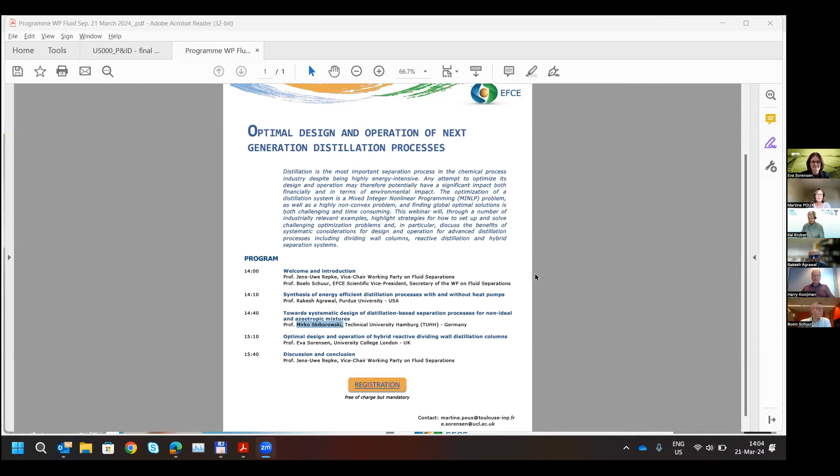We will be starting off with Professor Rakesh Agrawal, formerly with Air Products and now at Purdue University. He will talk about synthesis of energy-efficient distillation processes.

That talk will be followed by Kai Kruber, who is filling in for Professor Mirko Skiborowski from the Technical University of Hamburg, speaking towards a systematic design of distillation-based separation processes.

And we will round up with Eva Sorensen, at UCL, University College London, on the optimal design and operation of hybrid reactive distillation columns.

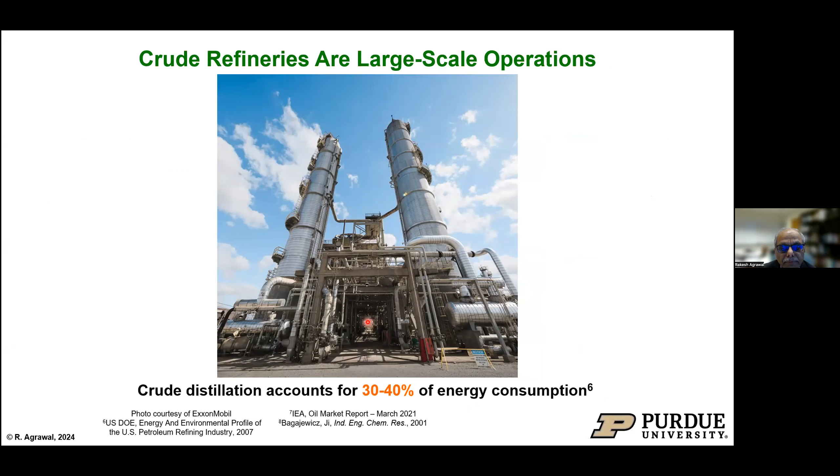Roughly 82 million barrels of crude are processed every day, and about 2% of the crude oil is consumed in the separation, the crude distillation itself. So for every 100 barrels, 2 barrels go towards distillation. If you were to reduce the energy consumption by 15%, implemented worldwide, you could save 245,000 barrels per day. So the impact could be quite humongous.

Around 7-8 years ago, we got together with ExxonMobil, and in collaboration we developed a method, and used that method, which is what I'll be sharing with you folks. So what does the crude distillation look like?

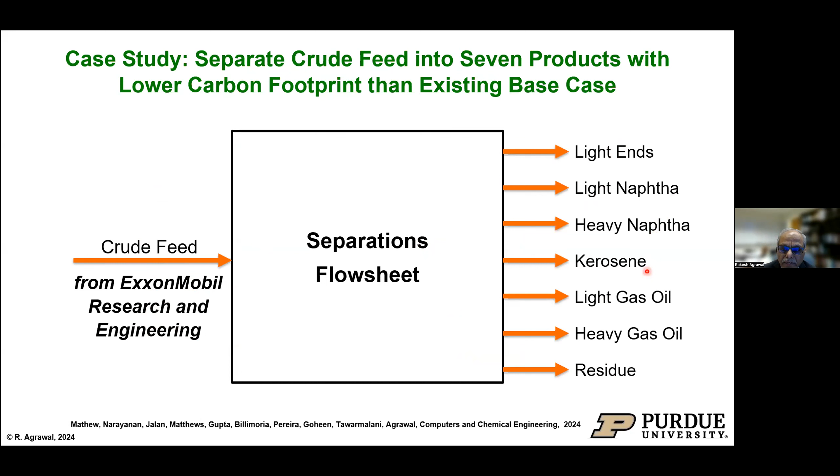The crude distillation basically, as you see on this screen, takes the crude feed and separates it into 7 components: light ends, light naphtha, heavy naphtha, kerosene, light gas oil, heavy gas oil, and of course the residue.

The overview of the method we employed was: first we collected all the problem data, meaning crude oil information, estimated their physical properties, and simplified the base flow sheet. Then we generated the search space of all possible configurations, used some reasoning for retrofitting, reduced the search space, optimized the model, and then walked backwards to generate the final flow sheets. That's what I will take you through.

Here is the crude distillation as given to us by the team at ExxonMobil. The crude oil comes in a pre-fractionator, it is distilled, there's a heater at the bottom, and this is the atmospheric distillation column with side strippers, where light end and light naphtha are produced, and the rest of the components follow: heavy naphtha, kerosene, light gas oil, heavy gas oil, and the residue.

So you can see there are 1, 2, 3, 4, 5, 6, 7 products.

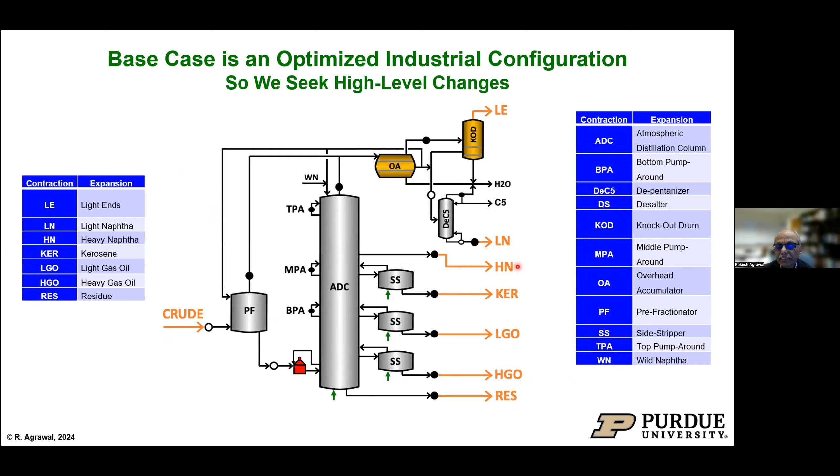In order to simulate and understand what is happening in the process, we simplified the flow sheets. For a given distillation, generally there's a condenser, separator, then pump the liquid to the column, and then the reboiler and so forth. But in my representation, I will just show the distillation column as a simple system with a condenser at the top and reboiler at the bottom, where the condenser is solid and the reboiler is hollow. That's the only difference.

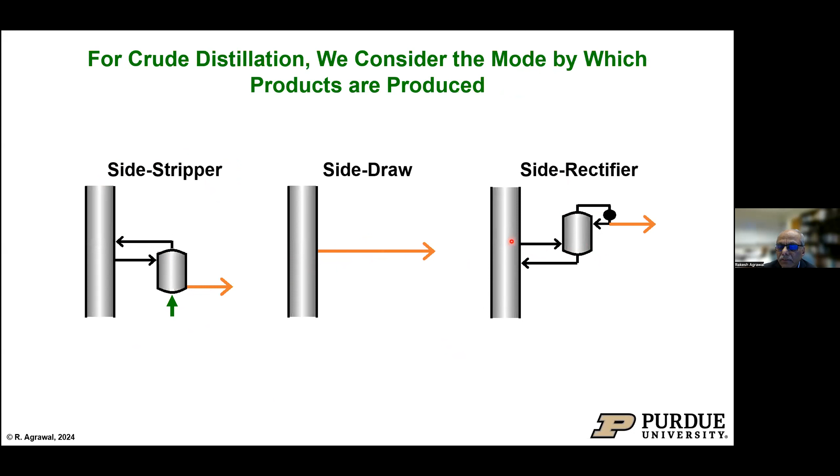The crude distillation uses a side stripper and side draw. It does not use a side rectifier, but we did include side rectifiers in our search space. That was introducing the crude oil.

If it is a 7-component distillation, 6 columns will be needed to perform the distillation. Here again is the crude distillation flow sheet, which is quite complex. As you can see, there are pump arounds for cooling, and steam is injected at various locations.

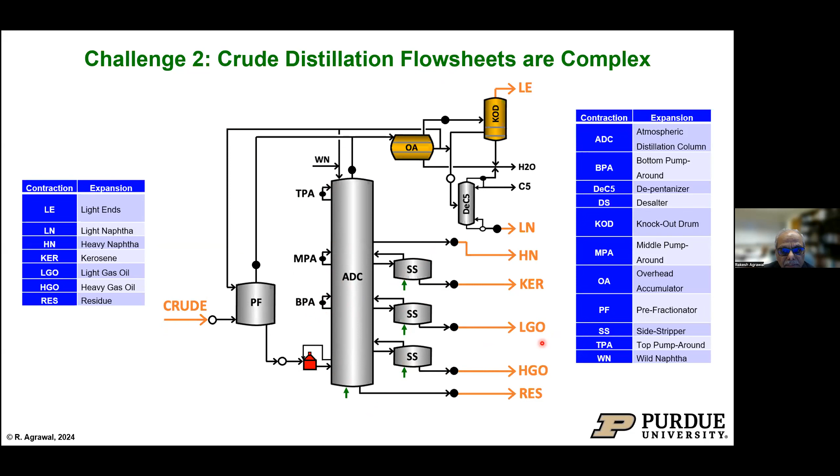Simulation of such a flow sheet is quite tedious and very time consuming, and it is not conducive to optimization. So we began to simplify the flow sheets to make them amenable to optimization. On the left you see the actual crude distillation.

We simplified it by removing all the steam injections with the reboilers, as you see on the right side, and also the reboiler at the bottom furnace which heats the residue. So we simplified the flow sheet, and all the light ends, light naphtha, and so on are represented as A, B, C, D, E, F, G. So the first step is to simplify the flow sheet.

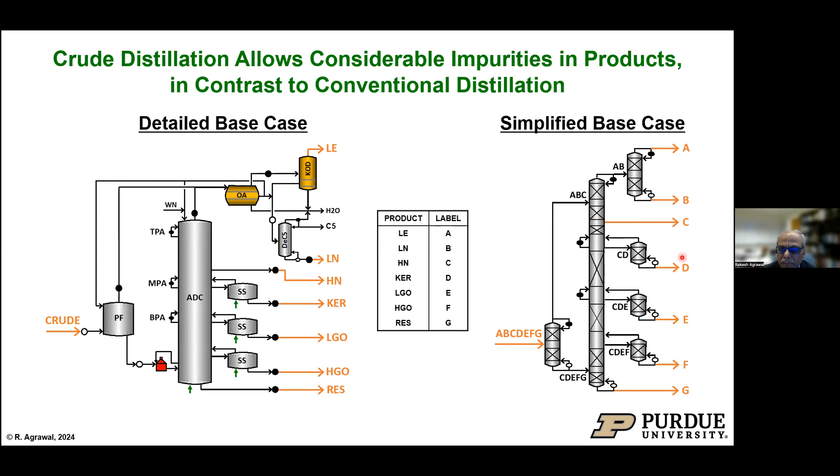All the methods so far in the literature, like for synthesis, produce pure products. But crude is not a pure product, as we said earlier, so all these fractions produced here do allow other heavy components. We decided we will allow that.

For example, the light naphtha, which is B, can also have some A, which is light ends, and it can also have some heavy naphtha components. So we allowed for some impurities to be present. Kerosene, for example, which is product 4, could have some heavy naphtha and some light gas oil. This way we allowed the adjacent components to be present.

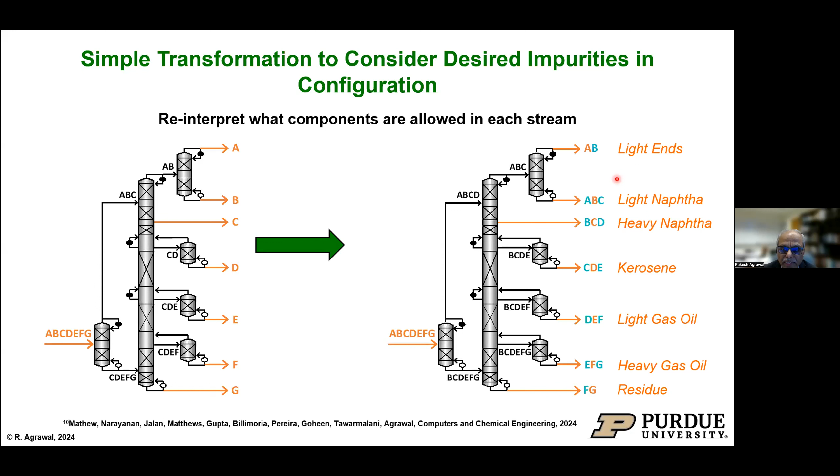For that, we had to modify our interpretation. Previously in the literature, all components were treated as pure; we simplified that and added the possibility of the lighter or heavier adjacent components being present in the product stream.

Then we synthesized the search space. For the search space, we included all the sharp splits, meaning A and B are totally separated from each other. We also included thermally coupled sharp splits, meaning the vapor from one column goes to the next column, and the liquid from the next column provides the reflux.

In these two-way thermal coupling systems, there's no reboiler or condenser. We also allowed for the sloppy split, meaning a component overlaps between the top and the bottom of the distillation column. For example, component B overlaps between the distillate and the bottom product, and thermal coupling is also allowed in these sloppy split configurations.

Using this method, we can take the column arrangement I already showed you and rearrange it, because the way it was drawn from the simplification of the actual crude distillation is not amenable to the methods used for optimization.

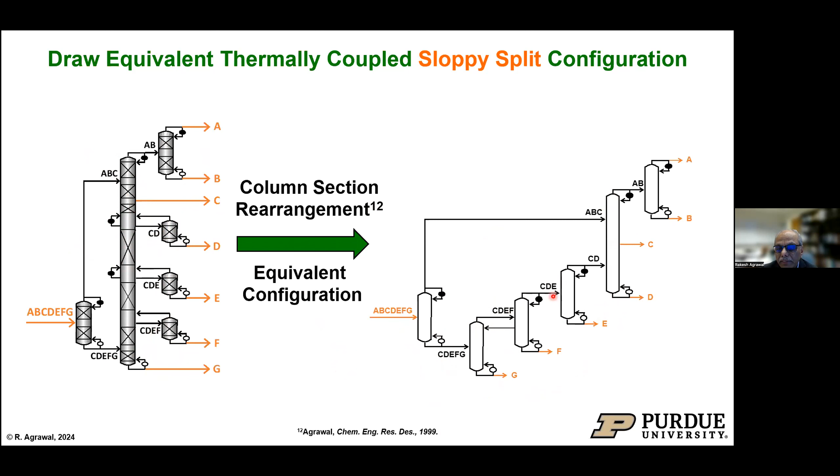So it is redrawn on the right-hand side in a simplified manner, as I told you, with the condensers and reboilers. What you notice is that the configuration on the right is exactly the same as the left as far as energy performance is concerned. Those are two equivalent column configurations, and you can easily draw them by moving the sections. For example, you could take this side and move everything underneath to the left, then move everything on top to the right, and so forth. This was published a long time ago, and the advantage is that now every column has a bottom and a top, bottom and top, bottom and top. So it is much easier to model.

Then we use Shah and Agrawal's method to draw all possible configurations. In this method, you represent all the streams in a matrix, and if the streams are present, they are 1; if not, they are 0. By assigning different streams, you can generate all possible column configurations. When you do that for crude distillation, remember there are 7 products, and for that there are roughly 85 million ways in which you can arrange these 6 distillation columns to find the most optimal one.

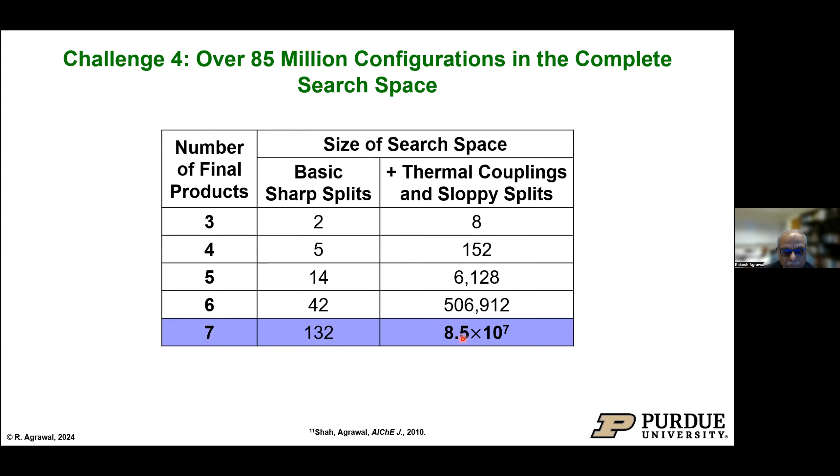So what we did was take that method and simply add to it, as I said earlier, the possibility of presence of adjacent components. The pure search space did not change because we still use the Shah and Agrawal method with only this added possibility. So there would still be about 85 million configurations to solve, with the only exception that the formulation now has to allow for adjacent components.

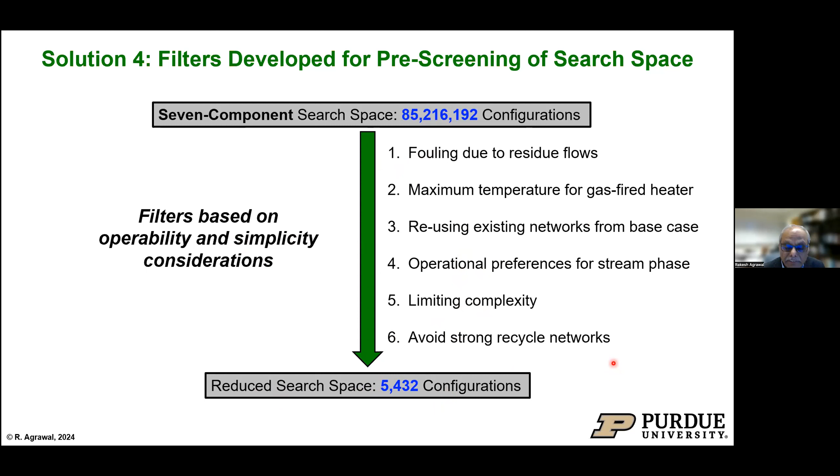When we used that, the search space was reduced to 5,432 configurations. By the way, that is still a very large number to go through to find the optimal configuration.

They also wanted to ensure that some of the existing systems could be used, specifically the top knockout drum, the depentanizer, and the water recycle. So we took all that and included it as a simple column A to B. This whole configuration is now converted to what is shown on the right side - the left is the actual one, the right is the simplified one.

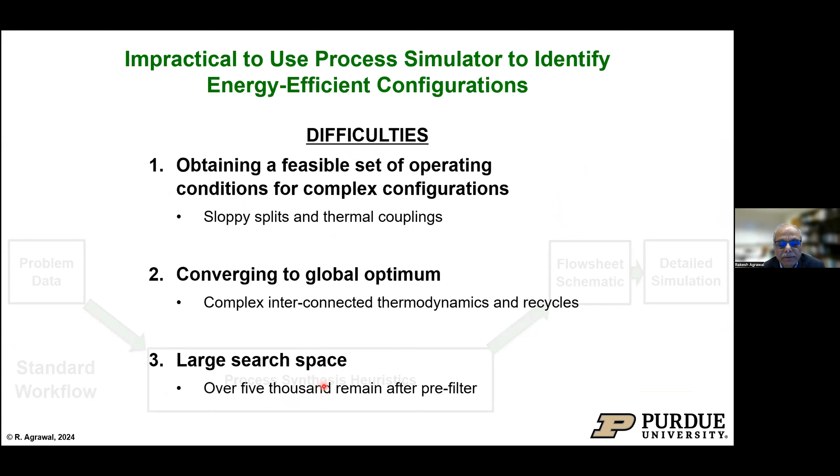Normally, one would use process synthesis heuristics to solve these simulations. But the difficulty with heuristics is that a feasible set of operating conditions is very difficult to get. For any given configuration, figuring out the split of components between top and bottom is almost time consuming and tedious even for simple systems. There's no way to converge to global optimality, and with over 5,000 configurations, the problem is quite complex to be solved by any heuristic.

So what we did was generate all those 5,000 plus configurations, then used our shortcut optimization model, did some candidate selection from the configurations - a handful of them - and then did the detailed optimization.

So how did we do our formulation? What does our formulation look like? We used our earlier formulation but made a lot of changes for crude distillation. In the past, what we've been doing is minimizing the total reboiler vapor flow rate between all the reboilers, okay?

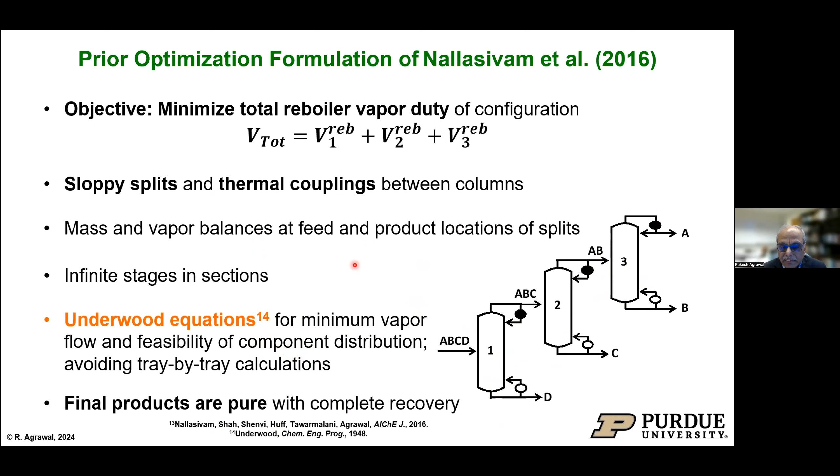Thermal couplings were obviously allowed, and we do mass and vapor balances everywhere, and we use Underwood's equation to calculate the minimum vapor flow in each one of them. And of course, the final products are pure components in the past, but now we will not do that, right?

So what are the assumptions of the original shortcut models, like constant relative volatilities, non-azeotropic mixture, uniform pressure, and the usual McCabe-Thiele assumptions of constant latent heats and every component having an equal latent heat, leading to constant molar overflow. But this model, by the way, works pretty well, as we showed in one of our publications.

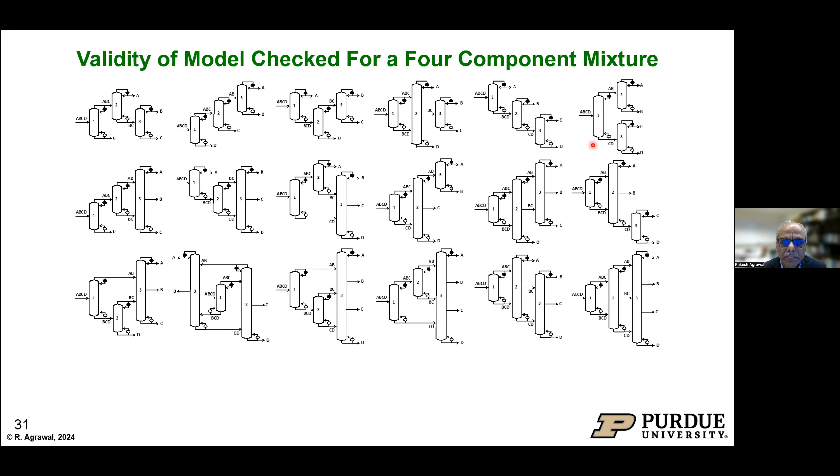For example, for a 4-component mixture, there are 18 possible ways the 3 distillation columns can be arranged. And the goal is to find the most optimal one.

The reason for that is basically to calculate the split of the flows between components which are overlapping. For example, like AB and BCD, how do you find what is the split between the B and so forth? And BC and BCD, how do you find the correct split between BC and CD? That's what makes it so complex.

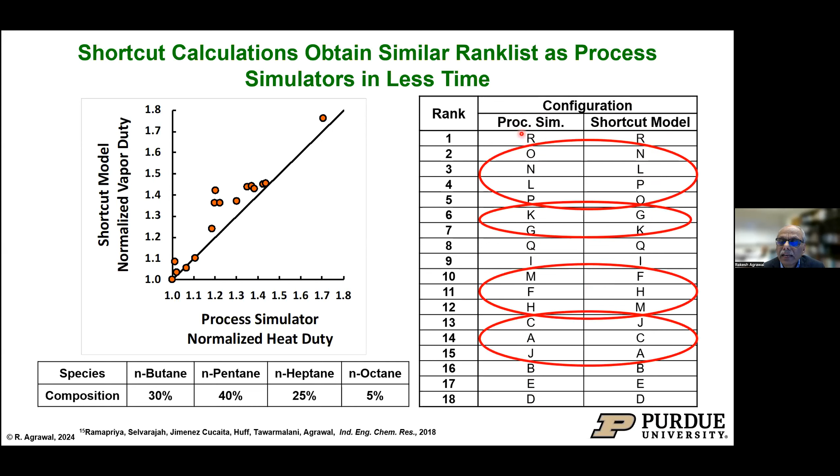However, we still wanted to modify that for crude distillation, because there's a great deal of variation in the relative volatilities between those 100 components. So the assumption that components have constant relative volatilities, we challenge that. The assumption that components have the same latent heat, we challenge that, okay? And the restriction that products are pure, we challenge that.

And not using a condenser, we allowed for some heat integration between the reboilers and condensers. So how did we do that?

The first thing was we took the relative volatilities and we said, well, this is the vapor liquid equilibrium, the actual vapor liquid equilibrium. So we did not treat it as relative volatility being calculated either at the feed or the product ends, none of that. We pretended that this is the real equation.

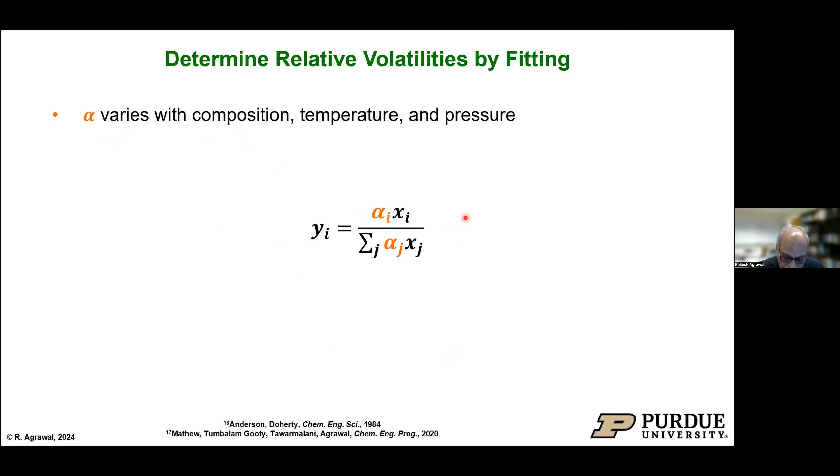So what happens is it becomes our surrogate VLE model, and we fit that to the actual vapor liquid equilibrium data while minimizing the error in the prediction. And that's how we calculate the relative volatilities now. It really predicts very nicely the vapor liquid equilibrium in all the distillation columns.

Now what happens is the assumption of constant molar overflow is no longer needed, and unequal latent heats can be accounted for. And now, rather than minimizing the reboiler heat duty, we minimize the actual heat duty for each of the distillation columns, okay?

And then what we did was for the products, like I said, for brownfield application, new products must be similar to the base case, right? Because if you're already doing a distillation of the crude, you don't want your product compositions to change significantly. Therefore, what that means is the products must remain the same phase.

But we did allow some tolerance between the existing distillation column flow rates and the new distillation column flow rates. And those epsilons are the tolerance between what would be calculated, what was the base case, and a little bit less than base case, and a little bit higher than base case.

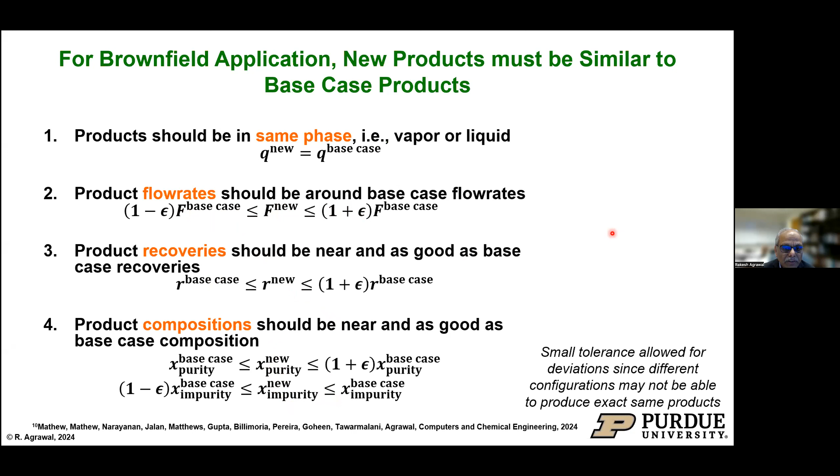We did that for the recoveries, and we did that for the purities and the impurities. Some leeway is allowed in the variation in the flow rates, as long as the recoveries are maintained and the purities are maintained within some tolerance.

We developed a new method, like the shortcut method, to allow for heat integration between the reboilers and condensers. What that means is, for example, this condenser ABC could produce the boil up in B, and this is possible as long as the bubble point temperature of the vapor coming from column 1 is higher than the saturation temperature of component B. So as long as ABC vapor is warmer, it can transfer the heat here, so we don't need an external heat source. So in the model, how do we check that?

We came up with a new method. We defined a term called beta, which is the reduced relative volatility. As long as the beta of stream ABC is less than the beta of stream B, this temperature is justified, and we provided a proof of this. So now in the optimization, as long as we know the compositions, we can calculate the betas, and therefore we know whether the heat integrations are allowed or not.

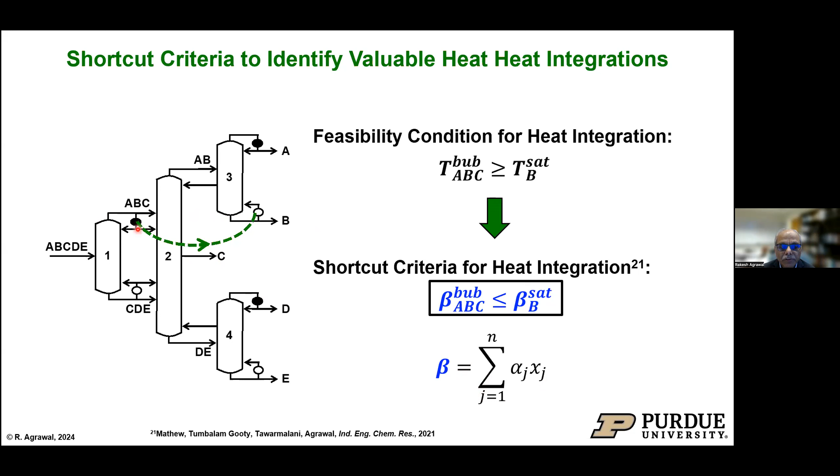So we could allow for the heat integrations, and then we also put some additional constraints related to what was given to us: the residue must be in the liquid phase, the upper limit on the temperature of the gas-fired heater was given to us, and the light ends portion on the top must be in the vapor phase.

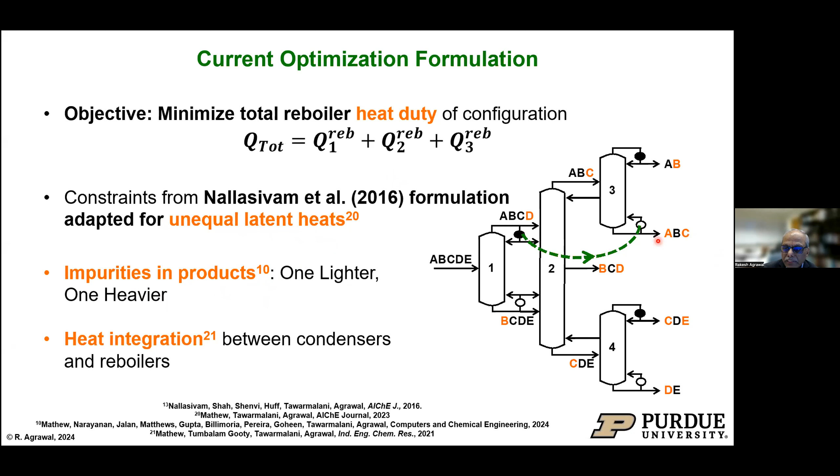Using all that, we optimize the problem. We optimize the Q total — as I told you, now we are optimizing the actual heat duty. And while accounting for the unequal latent heats, impurities in the products are allowed, because as you can see, B output have A and C, and the heat integration between the condensers are allowed.

So what happened now, the model has become much better because the vapor liquid equilibrium is a surrogate of the true VLE, and also there's no more assumption of constant molar overflow. We have a constant heat transport, and we use those assumptions in the optimization model then to optimize. And for optimization, I will show you some of the results now.

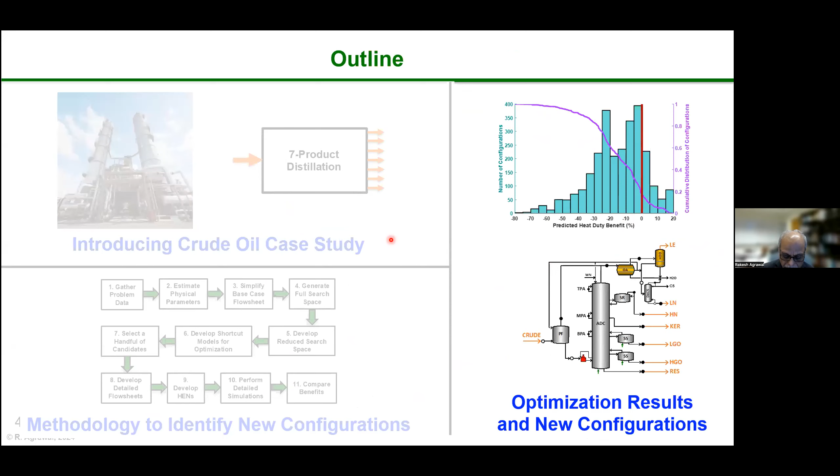So the results are here. What you find is that all 5,432 configurations were solved using the model. And what we find is that only 465 configurations within the constraints given to us would consume lower heat duty than the existing crude distillation.

The beautiful part of our optimization routine is that almost all of them converged. 2,732 infeasible means that these configurations cannot meet the process specifications being imposed, meaning either the purity is violated, or the flow rate is violated, or the recovery is violated. But from the ones that converged, we identified 465 configurations.

I will show you the results of only 2, because out of these 465 configurations, we have to take a handful and check with detailed Aspen simulation to make sure that what we are predicting is correct. Because the model has simulated all those 5,000 plus configurations and has given us a small subset of configurations which it claims to be better than the crude distillation.

So we picked only 2 because I have to tell you that each one of these configurations to simulate in Aspen Plus took us a good amount of 4 to 6 months. So that gives you the magnitude of the problem involved here.

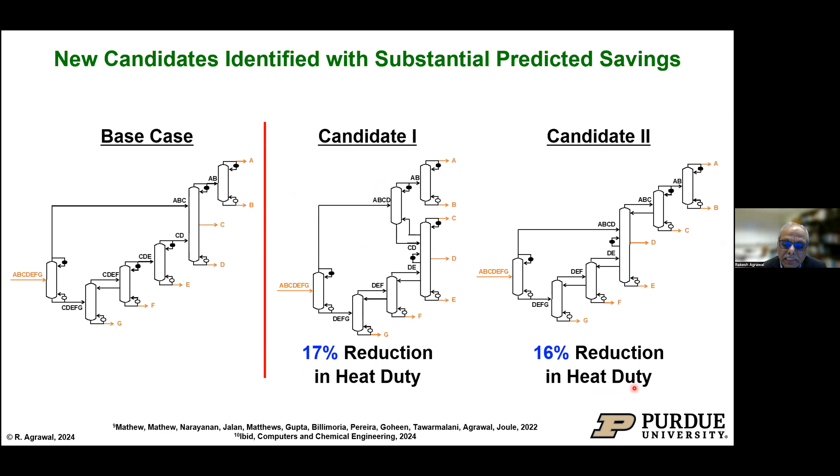So I'm just going to show you 2 candidates, candidate 1 and candidate 2. Candidate 1 from our shortcut model says it should have a 17% reduction in heat duty. Candidate 2 says we should have a 16% reduction in heat duty compared to the base crude, meaning the current crude distillation. So what we did was, now we have to walk backwards, meaning take the simplified flow sheet and create the actual crude distillation, how it would look like. So now we are walking backwards.

The first thing you notice is that suddenly candidate 1 has a side rectifier, as against the current configuration which only has side strippers. It moved C to be on the side rectifier and D as a side draw. So it made skeletal changes to the flow sheet. In candidate 2, D should be produced as a side stream and C should come out of the stripper. That was interesting.

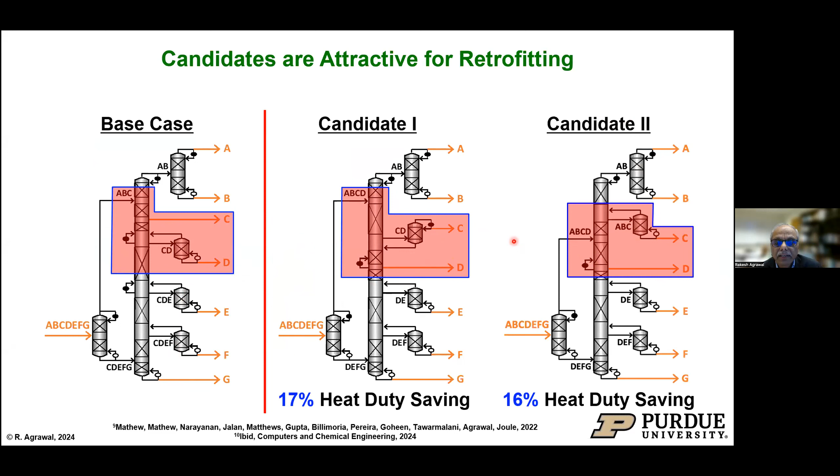Then we took simplified candidate 1 and further converted it to a detailed configuration with all the steam injections, basically replacing the reboiler for E, for example, with steam. So this configuration is equivalent - if you were to build it, this is how it would look. We are walking from the actual flow sheet, to the simplified flow sheet, to now creating the actual distillation configuration.

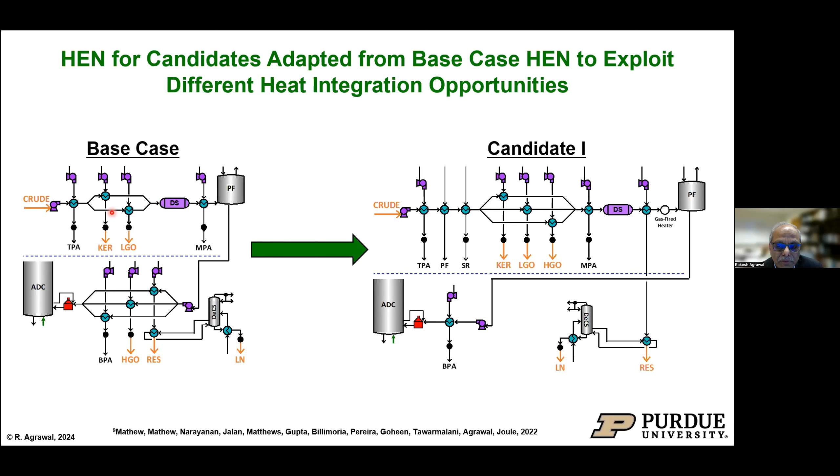Then it was simulated in Aspen, along with the heat exchanger network. When the feed comes, we had to even simulate the front crude because there's a pump around where there's heat integration, and the pump arounds are at different locations. So we had to go back and work on the heat exchanger network in the front also, so it is in line with the distillation column. Both were optimized in Aspen together.

What we find from the detailed Aspen simulations is that for candidate 1, the actual savings predicted by Aspen is 15%, as against the shortcut model which predicted 17%. We are very happy because it shows that in this large search space, we can find distillation configurations which predict the order of magnitude of savings from the detailed process model to be roughly the same as from the shortcut model - candidate 2 gives 13% heating duty savings compared to the detailed simulation. Both also give equivalent carbon dioxide emission reduction.

So the power of the method is pretty nice. All the product streams produced also meet all the specifications, like ASTM-D86 temperatures were met - these are the deviations for candidate 1. The deviations are really small, the maximum deviation is 10% in the flow rates, and the average is 5%. So that's pretty good.

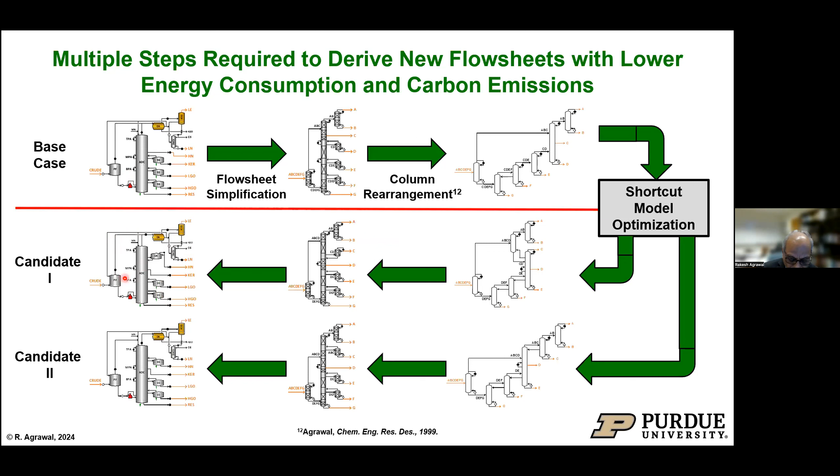So to sum up: you take the base case flow sheet, simplify it, and redraw it in an equivalent configuration with column rearrangement, so each column produces only one product at the top and one at the bottom. Then you optimize it in the shortcut model as described, find the candidates, walk backwards and arrange them the way a crude distillation column normally looks, with all the pump arounds and steam injections. Then you do detailed modeling of this configuration. So from 85 million configurations we came to 5,000 plus, and from those we can find configurations which are quite useful.

I had something on heat pumps, but I think probably two minutes are remaining, so maybe I should skip most of it, but basically heat pumps are something new in terms of possibilities to improve the efficiency of distillation columns. We are developing a model for heat pumps pertaining to multi-component distillation. If you look at a ternary system, just to give you a feel for how complex this problem is, a 3-component distillation uses 2 columns and has multiple reboilers and condensers.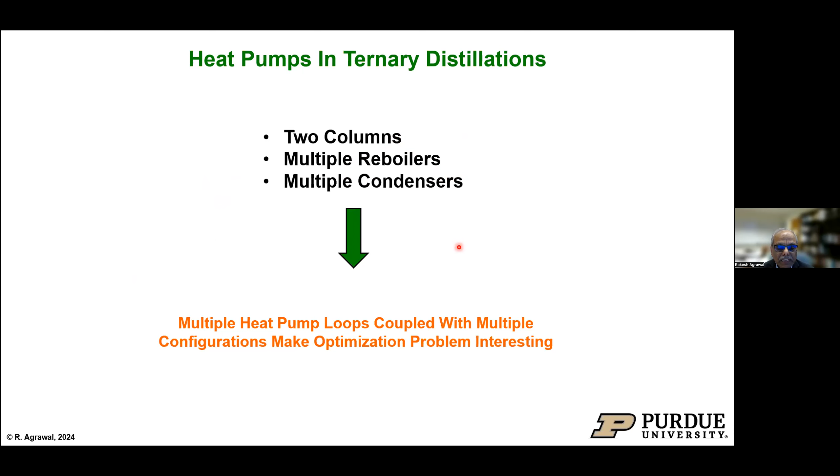Each column has a reboiler and a condenser, and what happens is the pump arounds can be heat pumps could be between any reboiler or any condenser. And when you use that, I'll just show you a glimpse, more than anything else.

If you consider a ternary mixture of pentane, hexane, and heptane, and you try to find the optimal heat pump, the answer is dependent on the feed composition, and there are many answers. As you can see on this triangular diagram, pentane is on this side as the lighter component, hexane is on top, and the heavier component, heptane, is here on the bottom left. You can see that different configurations with heat pumps are shown in blue.

For example, if you look at this configuration, the heat from distillation column A is pumped to the feed, and there's heat integration between B and A, because pressure is increased on the second column. So what that means is that the vapor from B can boil the bottom of the first column, and so forth.

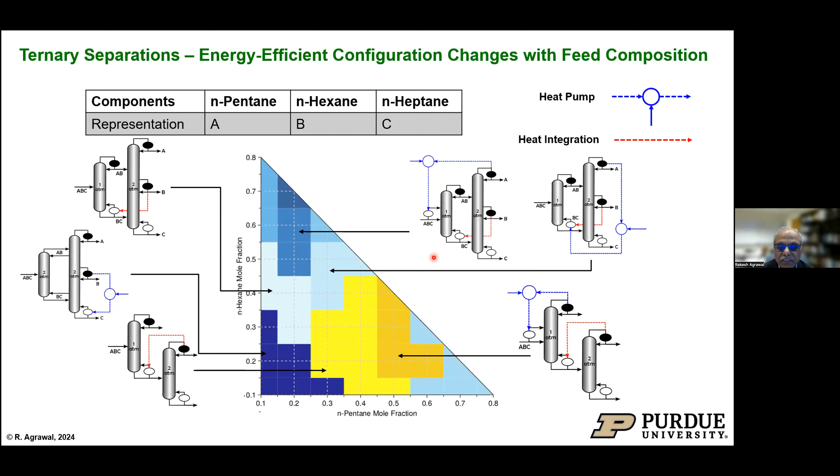So basically, I just wanted to give you a glimpse in the sense that when looking at the heat pump, depending on the feed compositions, the optimization problem is really quite a bit more challenging than it looks. But the energy savings could be quite large depending on your composition.

If the middle component is high, that gives you the highest energy savings, and as you go towards the bottom, the savings decrease. So the choice of the heat pump coupled with the choice of the distillation column sequencing and the feed compositions makes the problem quite interesting.

The bottom line message I wanted to give here is heat pumps should consider intercolumn heat integration, otherwise the heat duties are quite large. Column configurations change with the feed composition, and possibilities grow very quickly with the increase in the number of components in the feed. The problem is even more challenging than the earlier crude distillation problem which I described to you.

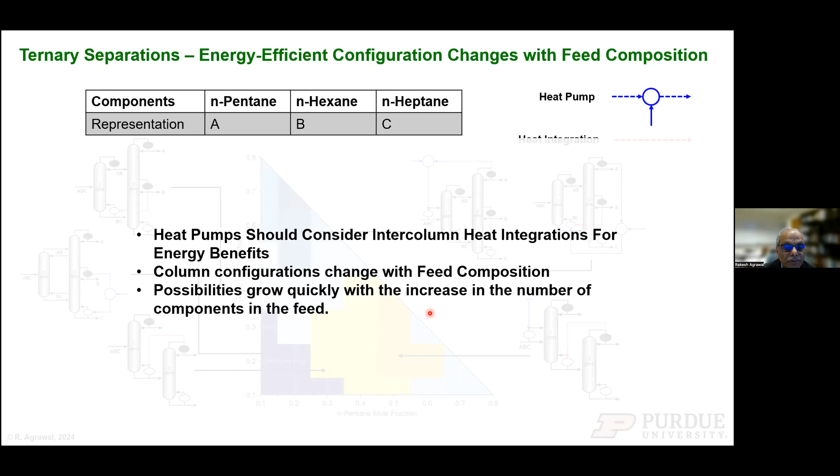So in closing, new configurations have the potential to lower energy consumption, but the process of identifying attractive ones has many challenges. We have developed a shortcut model which does capture the relevant physics of the problem.

We have gone through a lot of extensions, modifying the vapor liquid equilibrium curve and representation, and including the changes in the latent heats between the components. We also calculate the heat duties now, and calculate the heat integrations between the reboilers and condensers, and we allow for adjacent components to be present in any product stream.

And with all those modifications, our algorithm works extremely well. We took a very complex problem of the crude distillation, which is probably one of the most complex distillation problems one can imagine.

We showed that it is possible to find a handful of configurations with substantial reduction in the energy and carbon dioxide emissions. Finally, I wanted to tell you that we have begun to work on heat pumps for the multi-component case, and that problem is very exciting because it has many possibilities.

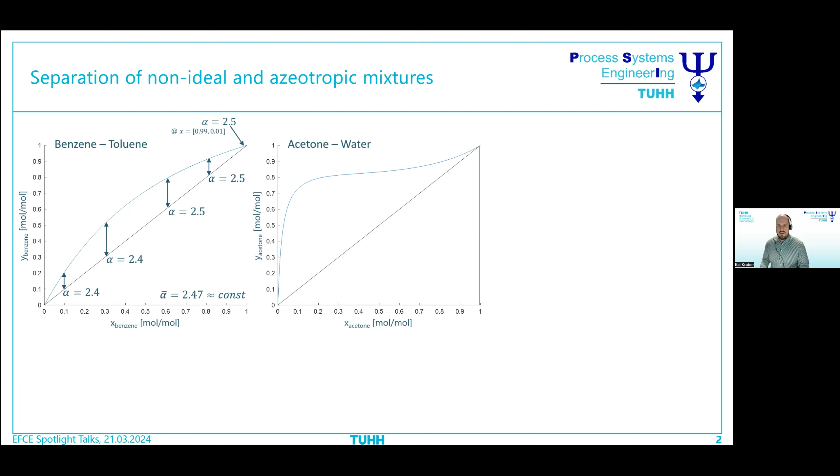We've already heard a little bit about the assumption of constant relative volatilities, but just to give a short introduction: as we all know, there are mixtures that act closer to ideality, for example benzene and toluene, where the assumption of constant relative volatility is certainly valid. And for example the mixture of acetone and water, where we can directly see that this assumption may not be used in simulation or optimization, because in the end the implication is that our best solution, or our best process configuration, is highly dependent on the assumptions we take, and may differ for ideal and non-ideal systems.

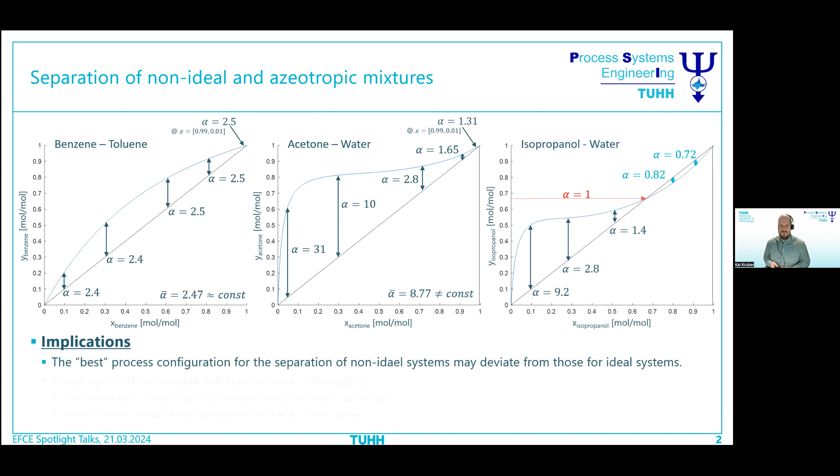And just to draw the full picture, as we're all aware, fully distillation-based separation is not possible for azeotropic mixtures - here, as an example, isopropanol and water. This imposes new challenges for the separation, like thermodynamic modifications, pressure swing distillation, extractive distillation or azeotropic distillation, and the consideration of hybrid processes like membrane distillation or extraction, and sometimes combinations like heteroazeotropic distillation, where we face new challenges as the processes get more and more complex and interconnected.

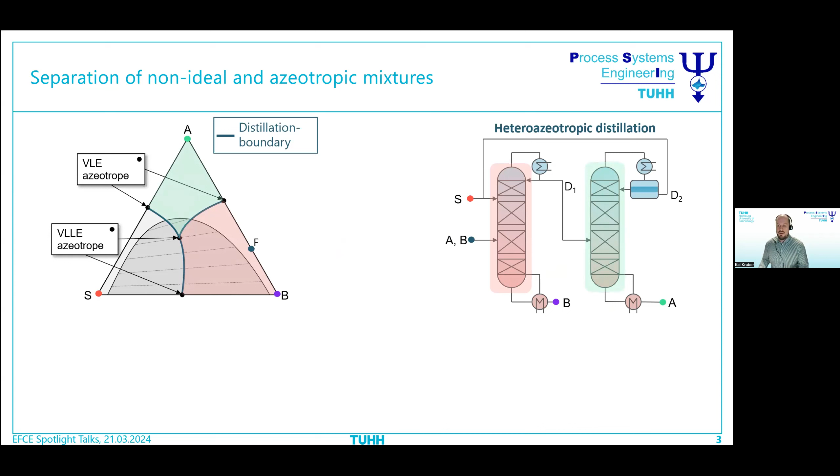So if we take a look at, for example, heteroazeotropic distillation, we already see that we have, even for a ternary mixture, a quite complex mixture topology with 4 azeotropes and 3 distillation regions. And we see here that the process is operating actually in 2 different distillation regions, and this makes the design at least challenging. So the generation of flow sheet candidates is very challenging. On top of that, we need to account for the choice of a mass separating agent to enable an efficient process design, and also in terms of optimization and process intensification, this is at least challenging.

So there's a need for systematic tools that support us in designing these non-ideal separation processes. One way - we already heard about the heat pump assisted part - is to look at energy efficiency. We oftentimes look at process costs or the pure energy intake of the process, but the energy efficiency, especially for distillation, is a very interesting measure to rate our process and how well it performs. The energy efficiency is the ratio of the minimum energy, or minimum work, to separate our mixture, divided by the actual work of the process.

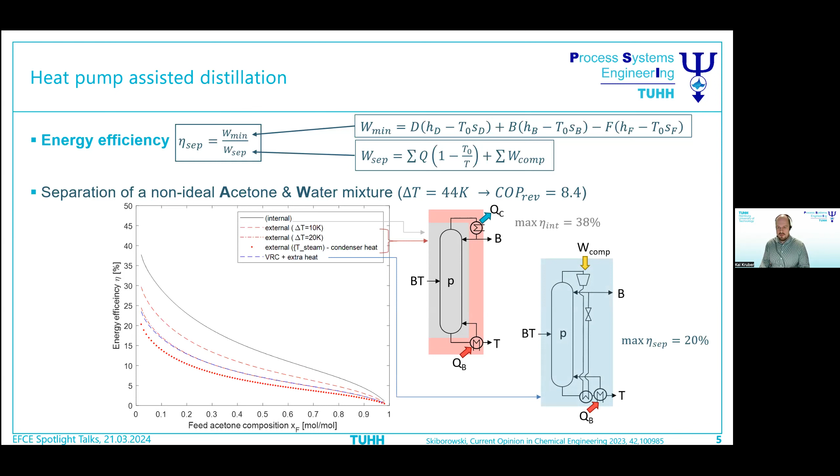If we take a look at the vapor recompression, we can increase it a little bit compared to the external one, where we do not consider our condenser heat being used in the process, but we cannot surpass 20%. And with increasing acetone composition in the feed, we drop quite significantly in energy efficiency. So why is this the case?

If we take a closer look at the binary mixture for acetone and water, we see that we exhibit a tangent pinch at the top of the column, at high acetone compositions. This limits our operating window and the efficiency we can reach here.

For the simple column, we picked an internal and an external efficiency for comparison, shown on the bottom. The external efficiency does not consider a fixed delta T, but rather a chosen steam level, a pressure level of steam for heating the reboiler. We can see here that we only have an efficiency of 8.7%.

If we take into account the heuristics that you learn at university, or that are common in distillation practice, a relative volatility above 1.3, maybe 1.2 to 1.4, should be enough. But we see that even at high concentrations of acetone, where we have a relative volatility of 1.3, the efficiency of the process is still really low.

If we now take a look at the vapor recompression for this simple example, we can see that we can increase the efficiency a little bit, but not too much compared to our external efficiency of 8.7%, which is due to the tangent pinch at this point.

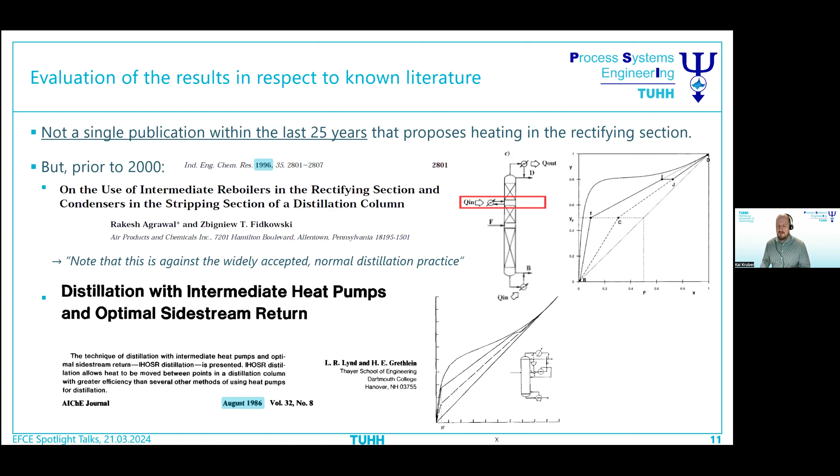to the internal efficiency of the simple column. This is very interesting. But no doubt, to build the process, this will get a little bit more complex. So of course we have to integrate our heat pumps, our vapor recompression in the process, but also we have to take into account that the vapor load in the different sections varies quite a lot. So we need to adjust the diameter in these parts.

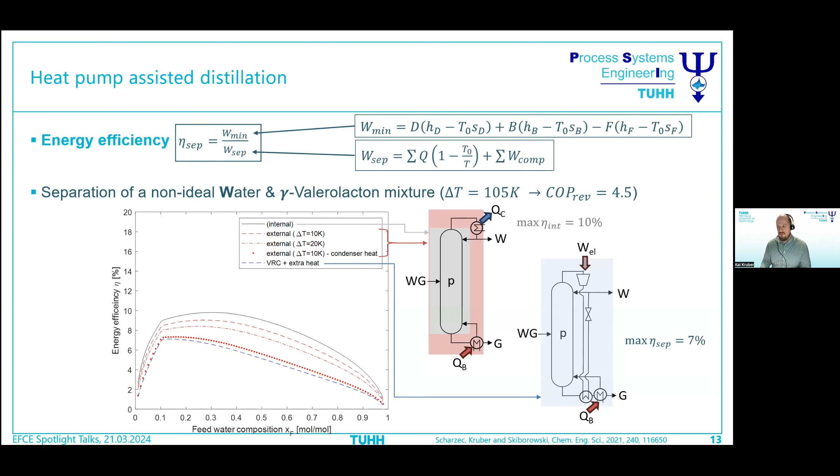If we take a look at another example, we can see directly for water and gamma-valerolactone that there's a very poor efficiency of at most 10% with respect to the internal efficiency. This looks even worse for the external efficiency. So even with vapor recompression, we are not able to push this really far. And this is mainly, again, due to a tangent pinch that occurs for high water concentrations.

Although we have a pretty reasonable relative volatility in the high water content areas, the process efficiency is determined by that. And we also have in our assumptions a feed that is an aqueous solution of GVL with only 5% gamma-valerolactone. And yeah, for that reason, we have the poor efficiency of the distillation column, since we have a very high distillate to feed ratio, and of course the tangent pinch in the rectifying section.

So in this case, it makes total sense to think about hybrid processes and to combine the distillation column with different unit operations. And in this case, we picked a few of them as an example: membrane-assisted distillation processes, extraction, heteroazeotropic distillation, or extractive distillation. And our selection has in common that we often need to select an optimal mass separating agent to get an economic and ecologic performance of the process.

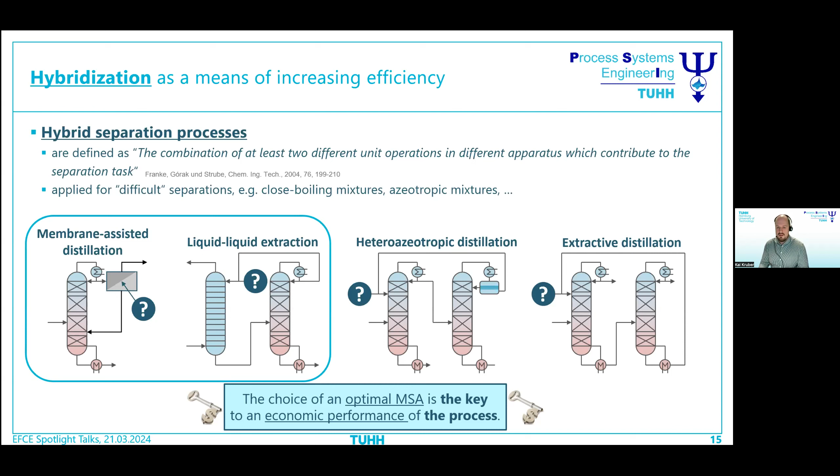This is, of course, especially interesting for our system, and as you may already know, for these highly diluted aqueous solutions, liquid-liquid extraction is very interesting for these processes. So the challenge here is of course first to find a suitable solvent, and in the best scenario, the optimal solvent. So what you can do is go to a solvent database, select and test with a few models. But in recent years, it gets more and more prominent to fill these solvent databases with predictive thermodynamic models, which is a great opportunity, but also increases the search space tremendously.

That's why at the university in Aachen, they thought about investigating 5,000 solvents for the shown case study. They used as a model a shortcut model for the extraction column and the distillation column. So they took a look at the minimum solvent amount needed to perform the separation and the minimum energy intake for the distillation column. The shortcut offers, of course, the opportunity that the calculations are very fast and you can easily take a look at thousands of solvents here.

But nonetheless, it has some crucial assumptions that with a detailed look at the process should be omitted at some point. So what we did is we took the results coming from Aachen and made a rigorous optimization for the process. We closed the recycle, formulated a superstructure optimization model, and took a look at promising solvent candidates here. Compared to the benchmark solvent butyl acetate, we could really improve the total annualized cost here by roughly 50%. This is a great example of integrating different levels of detail in the models.

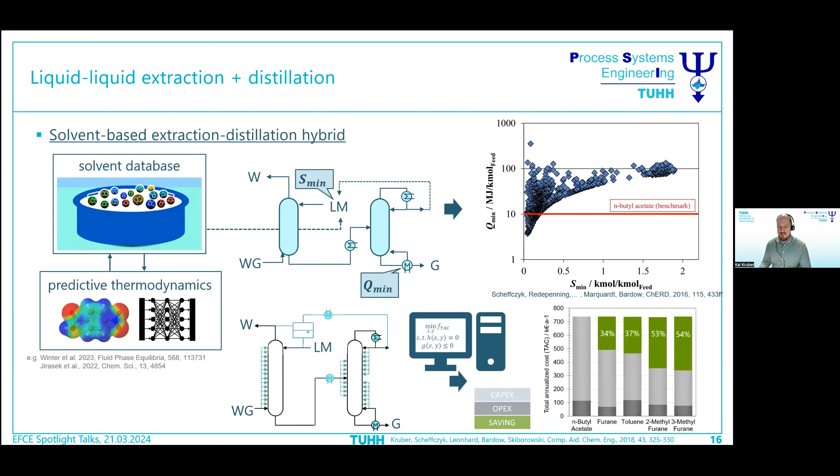What we see compared to the simple distillation column is that we have huge saving potential here for our benchmark solvent and also for the solvent toluene, for example. We can see that we save energy and total annualized cost in the comparison. So distillation, as already indicated by the energy efficiency, is not a suitable case for this part.

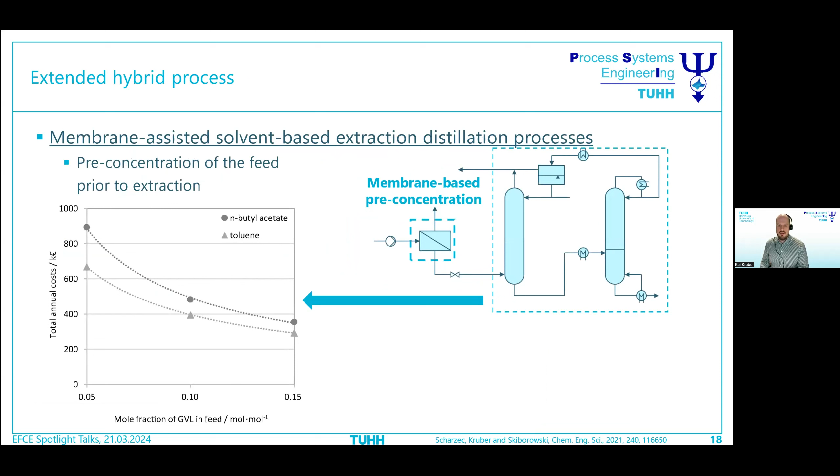We further thought about how to enlarge the process and improve it, and came across the idea that we could pre-concentrate our feed using a membrane process, because membrane processes are very well suited for concentration of aqueous diluted streams. So what we first checked with our existing model is whether there's a potential, and how big that potential is when we increase the mole fraction in the feed to the liquid-liquid extraction column. We saw a great benefit there, so we continued.

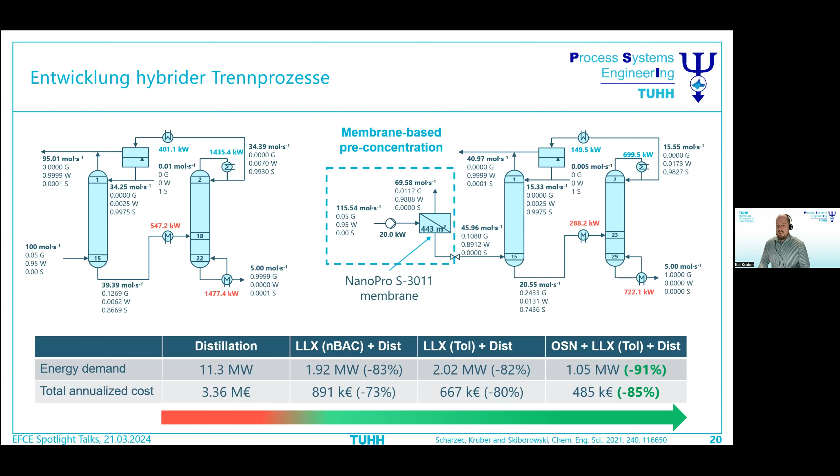If we now consider an example of separating azeotropic mixtures, I want to show you something we investigated for extractive distillation columns. Here, very comparable to the liquid-liquid extraction, we have the solvent selection, which we can do by looking at databases, or enriched databases with predictive thermodynamics, and try to choose an optimal solvent. We still have the challenge of the process design itself, so again here we have an optimization of a superstructure model.

Since both unit operations are distillation-based, we also have a considerable amount of heat integration we can do, so we can save a lot of energy here. What we considered was simple heat integration, the thermally coupled variants, which you see on the left, and also a heat pump assisted process — in that sense, a vapor recompression — for either column, that's possible.

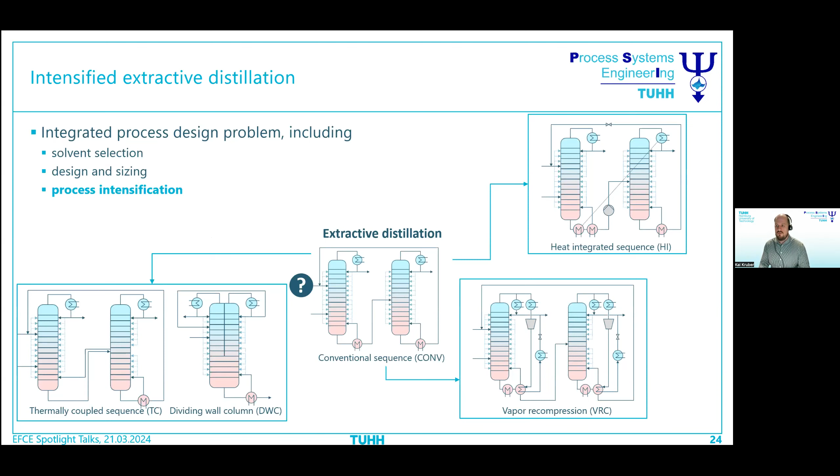We could have potentially put all this together in a big superstructure model and seen what the results are, but this would blow up the problem tremendously and make it very, very hard to solve. So what we did instead is a hybrid optimization method: we coupled an evolutionary algorithm together with our local deterministic optimization in GAMS.

In each generation, or for each individual, the evolutionary algorithm defines the solvent selection — it selects one solvent, one process intensification method, and gives initial starting values for the feed stages and the total number of stages of the different columns. So for the different individuals, we get back the fully optimized, locally optimized process with an optimal design, along with the information on the total annualized cost.

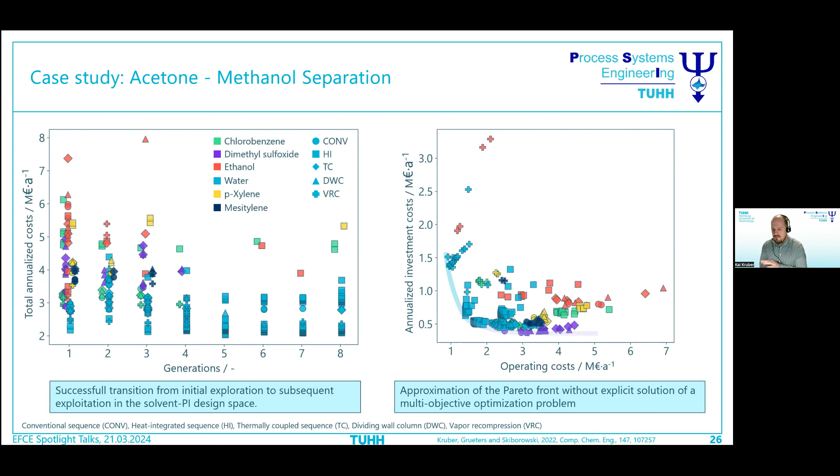As a final slide, I want to give you an even more detailed insight into the results here. If we now consider all the best combinations that occur throughout the evolutionary algorithm execution, we see that if we only considered the sequential step of selecting a solvent, taking a look at the conventional processes, we would see that DMSO may be the best candidate.

Then we would consider in the next step the means for energy integration, and we would realize that only the conventional process should be used in that case. But we would completely miss what we see if we do this examination in a simultaneous way. So having all the information at hand in the same step, we see that the simple heat integration of a water-based process can save even more in terms of the total annualized cost.

So what I've shown you is a different way of seeing the processes, basically an exergy-based approach, or as an objective, the thermodynamic efficiency. We can get some valuable insights here into how we can increase the process performance or what opportunities we have for energy integration.

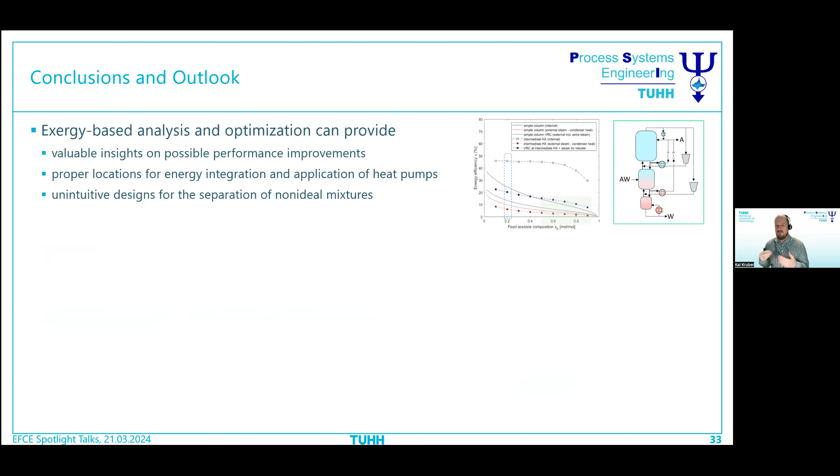I also showed you a few examples here for the hybrid separation processes and the challenges that go along with it. We need to consider, for example, the selection of a mass separating agent, the process configuration, and also the intensification all in one step. But we can significantly improve the processes that already exist.

Maybe as a very brief outlook, and also as an advertisement for the software tools and elaborated models that are out there, on top of that we can do very, very interesting things to improve and further achieve improvements here.

So we could think about flow sheet synthesis and design, and machine learning approaches to even get more out of these very valuable process models. And with that, I want to thank you for your attention.

Thank you, Kai. We have one question, an anonymous question, which I think is actually a very good one.

The remark is that normally vapor recompression is applied for systems with about 20 degrees C temperature lift, but in your case you showed one with 100. Yes, and the coefficient of performance is still 5.5. The question is how is that achieved?

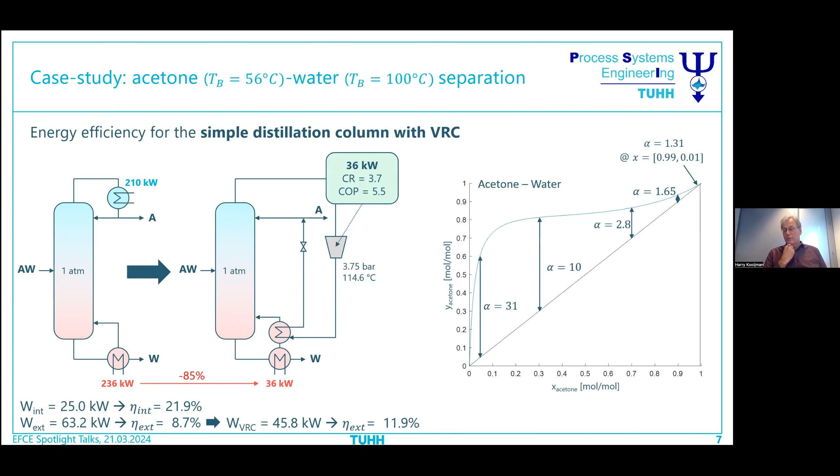In some ways, you could either tune or change the vapor state or the feed state more to vapor phase. And also you could consider doing electrical heating, because you can do electrical heating at any temperature level and it doesn't become less efficient. And as such, you can maybe move away from the fact that your heating medium is not the place where you apply it. Electricity and electrical heating doesn't have that disadvantage. And I was wondering whether you could extend your formulation for that.

Yes, that's an interesting point. So we haven't considered this yet, but we can definitely do that and consider this in the model. What we can do as well, and what you also mentioned, is the heating or the partial evaporation of the feed. And this was also suggested in the publication by Professor Agrawal. If the reboiler is very close to the feed, it maybe does not make total sense to introduce another heat pump there and another heat exchanger, but just partially evaporating the feed.

That's completely true, and with these decisions, we would need to develop further our software tools. But nonetheless, if we have all these opportunities and all this information at hand in an early design phase, we can better decide what to do next, of course. But yeah, a very good point here, and we will consider that in the future.

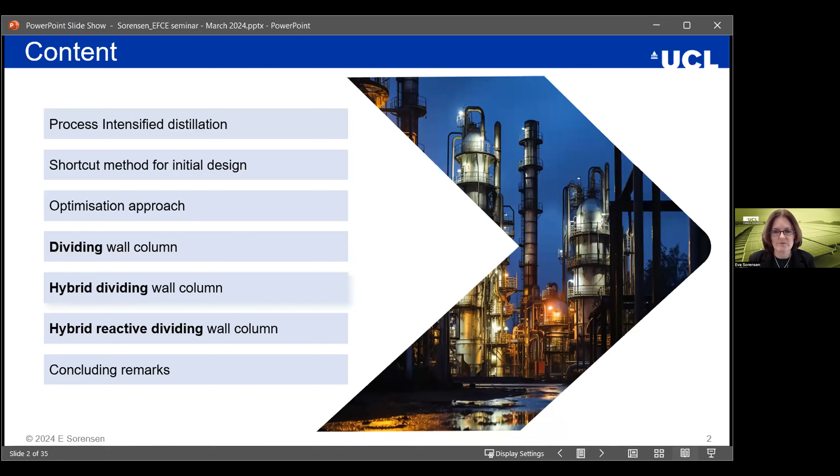So a bit about process intensification first. We all know distillation is a very energy intensive process. Rakesh outlined that in his talk at the beginning. So what we've focused on in terms of trying to improve these processes is to look at the more novel designs, process intensified designs, where we have a dividing wall column, where we're combining multiple columns into one. We've looked at reactive columns, where we are putting a reaction into the column, as well as hybrid processes. And there are, of course, others that fall under the umbrella of process-intensified distillation, but I will not be covering these here in the interest of time.

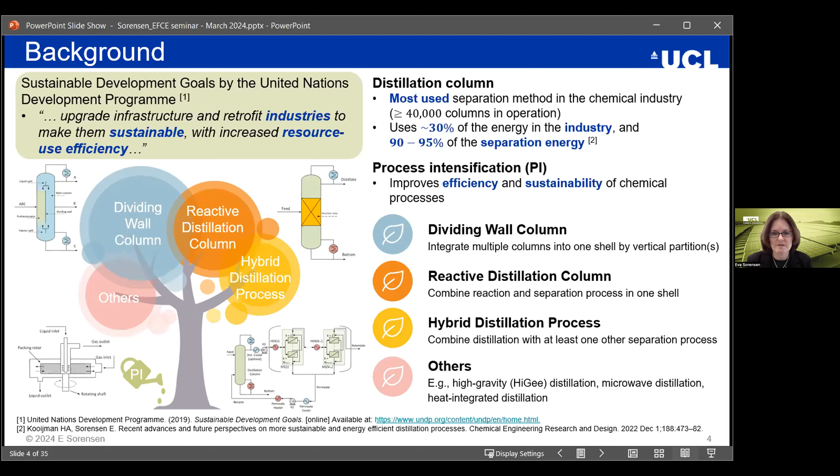So in terms of dividing walls, there's been a lot of focus on this over the past couple of decades. They are a great alternative to a standard direct or indirect sequence of separation, whereby we are combining columns. So you could have this as the sloppy split that Rakesh mentioned at the beginning, or we could have this with a Petlyuk structure with a pre-fractionator. Or we can put it together into a dividing wall column, whereby you have the separation of a ternary mixture, where you're getting pure components A, B, and C from a single column. Lots of work have shown that this has a free distribution of the middle boiler, because it goes to the top and the bottom on one side of the wall. It's more energy efficient, saves capital and operating costs.

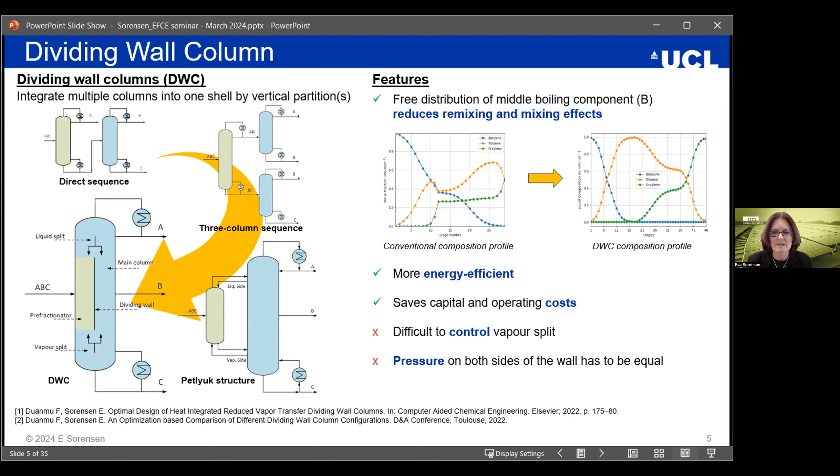But it's a bit difficult to operate here because the vapor splits that we have at the bottom of the column cannot really be controlled. We control the liquid split at the top, but we can't control the vapor split. And also in the standard sequences, you will have the option of having different pressure in different columns. But in a dividing wall column, you are stuck with, obviously, because it's one shell, the pressure on both sides have to be the same.

For reactive distillation, we are taking a reaction and putting it into a column so that we have a reactive zone within the column. This improves conversion, productivity, and selectivity, reduces catalyst amount, reduces energy capital cost. It may also eliminate the need for solvents if we have azeotropes. So a very good alternative for some reactions, but it has a more narrow operating window. We need to have similar temperatures and pressures for both reaction and distillation.

And we may need to have quite long catalyst life if we're using heterogeneous catalysts. And we'll need to get the residence time distribution right.

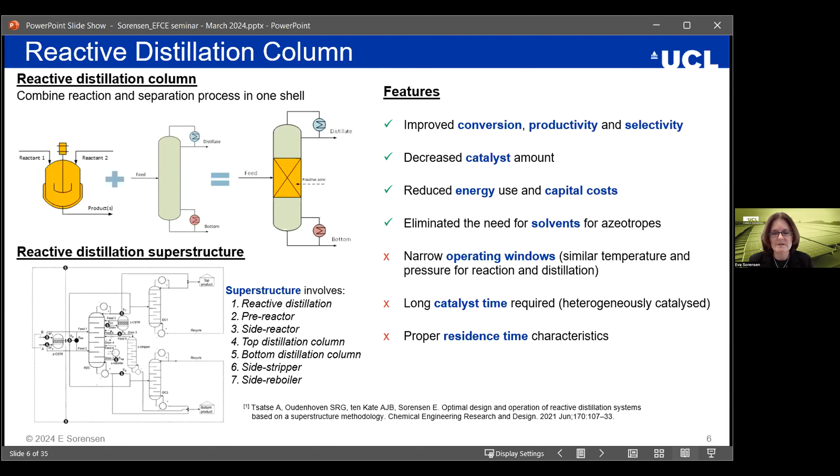Now, we've looked at this quite a lot and used a superstructure solution approach, where we've looked at alternatives of having the traditional approach with the reactor followed by a column, having a pre-reactor, side reactor, having additional columns to deal with some of the separation, and also the option of side strippers. So this superstructure approach is very much how we have considered all of our work. Kai talked a little bit about how they have done it there as well, so it's a fairly similar approach.

We've also looked a fair bit at hybrid distillation systems, where we are combining distillation with another process. The one I'm going to focus on here is combining it with membrane processes, where we integrate these two together. So for azeotropic systems, for instance, if you have a minimum boiling azeotrope, we can use the membrane network at the top to cross the azeotropic point, because the membranes are not operated on vapor-liquid equilibrium.

The benefit of these processes depends a lot on the availability of a membrane for that particular system and how good that membrane actually is. But as I said, they can overcome azeotropes, reduce energy consumption, possibly also operating cost, and you can have smaller equipment size. But the membrane system often costs quite a bit, and we have the same issue there in terms of temperature and pressure, that we need to take into account what the membrane can actually tolerate.

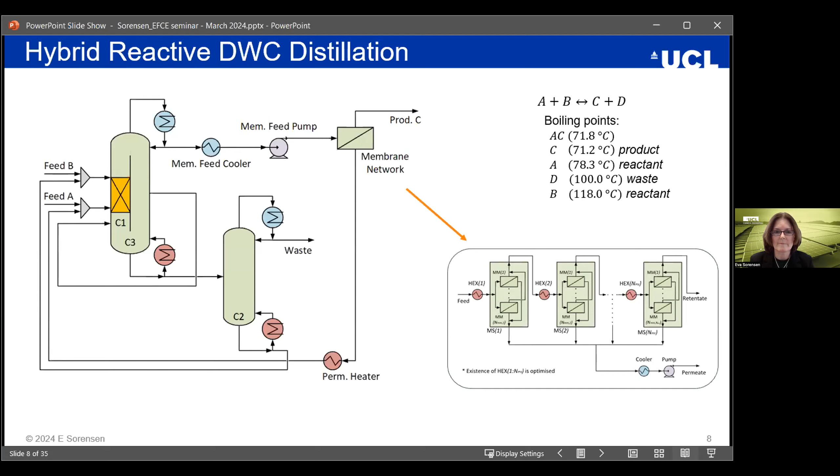I just want to mention a little bit first, both Rakesh and Kai have talked about how complex these optimization problems can be. We have used gPROMS for the model that we're running with our optimizations, which means we have a very large number of equations and a large number of degrees of freedom. So initializing these kinds of systems, you can imagine how many degrees of freedom you have in something like this - if you try to do that completely from scratch, it is practically impossible.

So what we have done is develop a shortcut design method - not Fenske-Underwood-Gilliland, not McCabe-Thiele, but an optimization-based process where we're decoupling the column or the column sections at the feed point, and then using feed stream information, light and heavy keys, construct that into a shortcut model that is looking particularly at the pinch point where the feed is coming in.

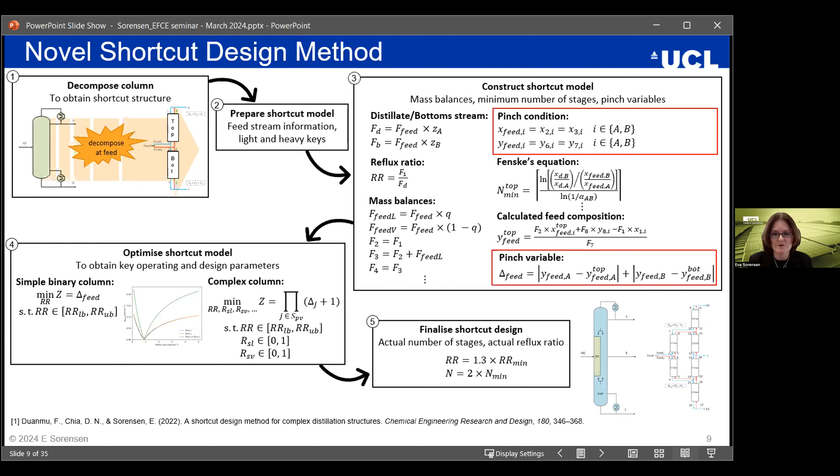And then we define a pinch variable, which is the difference between when we're guessing what the streams should be and what that pinch variable is. And then we just use basic optimization, quite simple, to try to minimize that difference. So for a simple binary column, there's obviously only one feed point. If you have a complex column with side streams and lots of other things, then you will minimize the product of these. This gives us the actual number of stages and actual reflux ratio in the column, but it gives us far more, because it also gives us initial values for all of the streams. And that obviously helps a lot to initialize these optimizations.

In terms of the optimizations, what I'm going to show you are some examples where we have minimized total annualized cost, looking at product purities of 99%, where for some cases, although not quite all of them, we have equal pressure drop on either side of a dividing wall. You can see the computer specifications here. We've used parallel processes for the optimization with a number of workers, and we've used a stochastic and deterministic optimization approach. So we're using gPROMS for the simulation, which is linked to a foreign object called Multiflash for the VLE.

The solution methodology we're using, if you try to solve these kinds of problems with a deterministic approach, you'll end up with a lot of failed initializations, even with a good starting point. If you try to do it stochastically, the solution time is very long. So we've also tried a combined approach, where we have an initial, preliminary genetic algorithm solution that gets us quite close to the optimum, but not quite there because of the solution time. Then we use that in gPROMS deterministic optimization, which gives us the optimal solution.

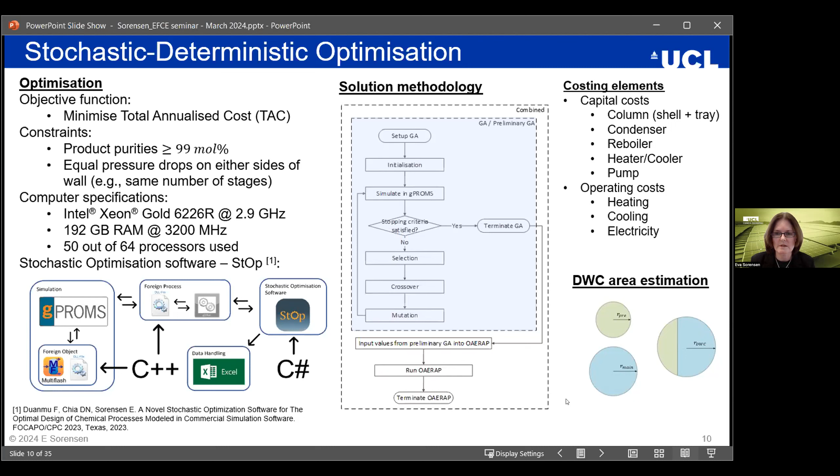For one example, if we try to solve a particular optimization with genetic algorithms, you'll end up with quite a long solution time. If you use the combined approach, you get some of the way there with the preliminary genetic algorithm, and then do a very quick deterministic solution, giving a much faster answer. I haven't shown values for the deterministic-only approach, because it requires so much manual manipulation to get it going that it doesn't give a fair comparison.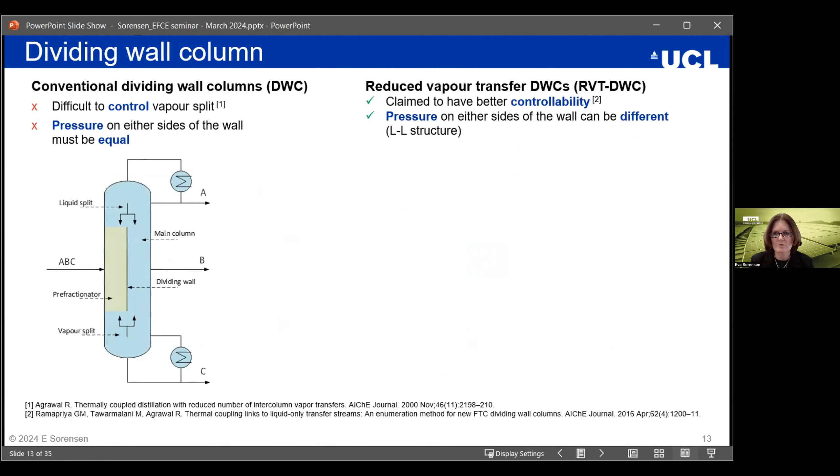Now we'll look at some dividing wall columns first. I said some of the drawbacks here were the issues around controlling the vapor splits and pressure on either side of the wall. What you can do is look at reduced vapor transfer.

This is something that Rakesh presented about over 20 years ago, where you stretch the wall either to the top or the bottom of the column, and you can also stretch it completely across the column. So rather than having the thermally coupled streams at the top and the bottom of the column, you now have a liquid transfer from one side of the column to the other. A drawback is that you then need two reboilers and two condensers, but as we'll see, in some cases these may be cheaper than the standard column.

When optimizing these, this would be the actual structure you would build, but for simulation and optimization we're looking at the thermodynamic equivalence of a Petlyuk arrangement. But as I said, with the costing, we are looking at something that much more closely resembles the dividing wall.

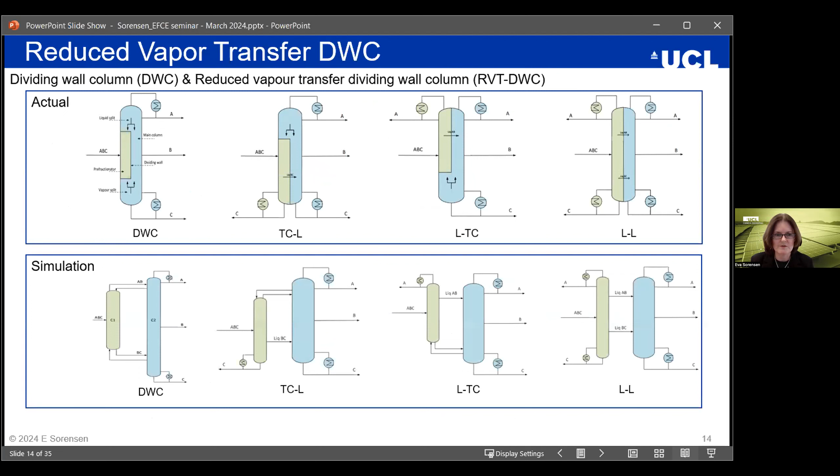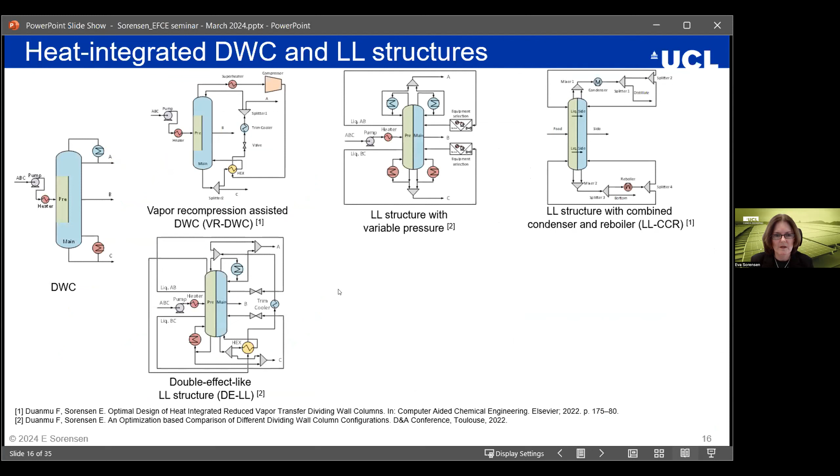If we look at the dividing wall again, we can also use vapor recompression, like Kai mentioned. We can do this just with a standard dividing wall column, or with the wall going from top to bottom, which allows you to vary the pressure on either side of the column. You can also combine the two reboilers at the bottom together into one structure, or split this so that you have a double-effect-like structure.

You can have the vapor recompression on both sides, or you can do the vapor recompression and combine the reboiler and condensers together. So lots of alternatives there that one can try out.

In terms of the results for this structure, if we look again at the benzene, toluene, orthoxylene example: that's the standard dividing wall, that's the vapor recompressed, that's the wall going all the way through, combined reboilers, double effect, vapor recompressed with the wall all the way down, and that's with the combined reboilers.

We can see here that for the double effect one, one side of the column had a much larger pressure than the other side. But for all the other cases, the optimum or minimum pressure was 1 bar, and all the solutions came out at 1 bar. We can also see that these were more expensive capital-wise, but the operating costs were lower.

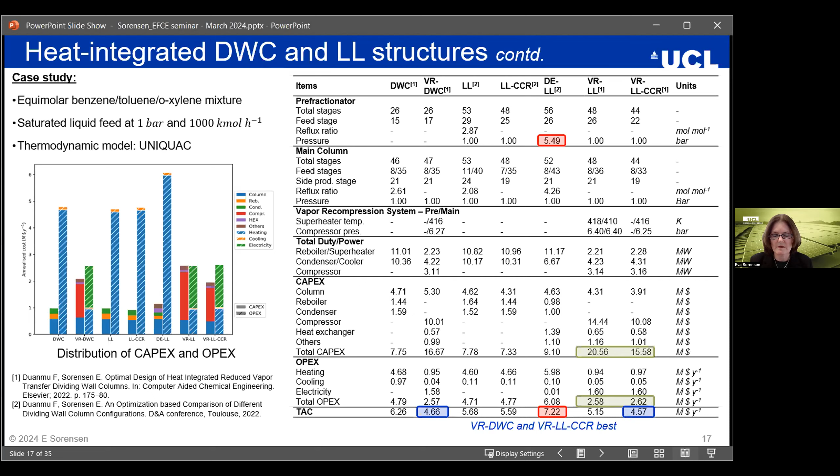Now, if we then look at how do we separate systems, we can do a simple ternary system in a dividing wall column, but if we then have an azeotrope, we have the issue of being limited by the azeotropic composition.

So what we can then do is add a hybrid, or have this as a hybrid system where we're adding a membrane system into the structure. We can do this in different ways.

This is for a minimum boiling azeotrope. We can have the membrane network here at the top, so it comes off the condenser drum, goes into a membrane network, and is then recycled back. One stream is taken out.

We can have the pervaporation and the distillation in a different order - so we do the pervaporation first - or you can have two columns with a membrane network in the middle, where the job of the membrane is basically just jumping over the azeotropic point, and then you can do the rest of the separation on the other side in the other column.

The membrane network we have modeled not just as a minimum membrane area - we've looked at this in terms of how many stages you would need in this membrane network. There will be some heat exchangers and potentially pumps in between, and also how many membranes you'd have in each stage, because obviously it doesn't have to be the same in each stage.

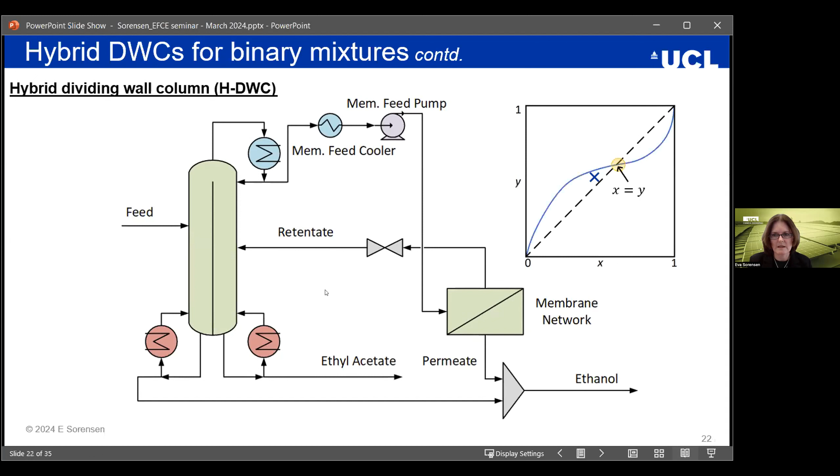The job of the membrane is to jump over the azeotropic point, purify the rest of the ethanol, and then send the retentate back in again. Thereby we are jumping over here.

Looking at that particular example, if we look at the various options, this is showing the results for distillation followed by pervaporation followed by distillation - you can see the small pictures up here - then the option of two columns with a pervaporation unit in the middle, or the hybrid, which I'll show you the picture of just here.

What we see is that the membrane networks, if we're doing just distillation and pervaporation either before or after, need quite a few membrane stages to do this. I haven't shown the number of modules per stage, but you can see there's a large number of membrane modules needed. For the hybrid, where we're just jumping over the azeotropic point, we only need 5, which is obviously a lot less.

In terms of costs, you can see that these are less than these - it's a bit less also than the distillation followed by pervaporation - but the hybrid here doesn't really win anything over just having a standard two columns and a membrane.

Now, I should say at this point that the results we're getting here depend on the cost of the membrane. For other examples, it would also depend on whether you actually have a membrane that can deal with this particular separation. So we've used a fixed price for the membrane here. In some other work that I won't show here, we've also looked at the impact of changes in that price.

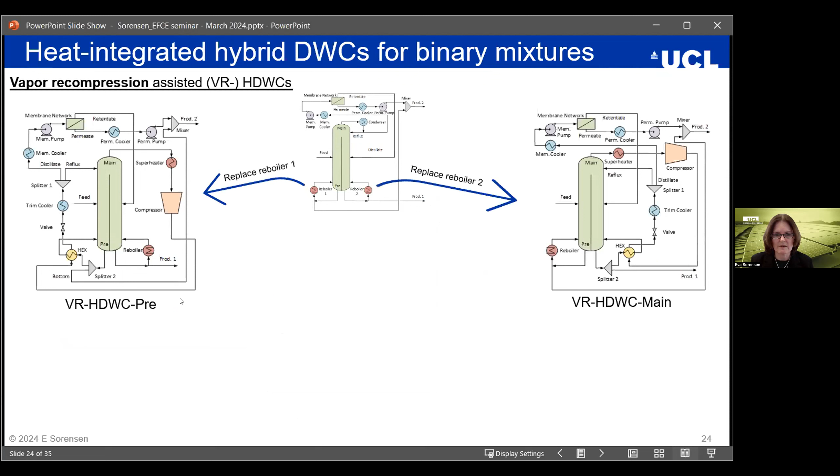Now we can also look at heat integrating the hybrid system. So you can have vapor recompression on the pre-fractionator side, on the main column side, or on both sides. Comparing those for a binary system, you can see the distribution of the costs we've got here. Compare this to the standard dividing wall column, that's the cost, and these are the vapor recompressed examples. Having vapor recompression on both sides saves a significant amount of cost.

Now, these two, having vapor recompression pre and on both sides, we've also looked at this for the hybrid, for a binary system. When we had binary distillation with a pervaporation step in the middle followed by distillation, it was pretty much the same as the hybrid.

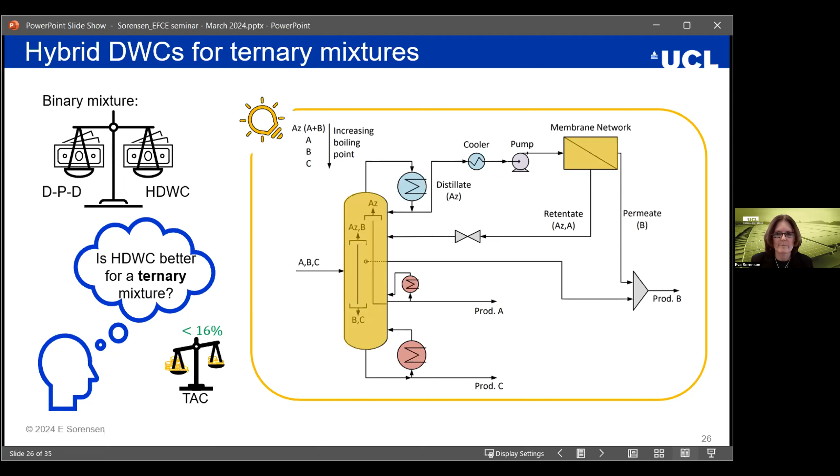Now, if we then have a ternary system, you can imagine having two walls here with a withdrawal between the two walls. That's also possible. We have looked at that, but I haven't got time to show you the details. We can see that the total annualized cost does go down, so having more walls is beneficial in this situation.

Now for the final thing I wanted to show you, the hybrid reactive distillation wall column. I'm going to look at a generic reversible reaction system: A plus B goes to C, with C being the product and D being a byproduct, where there is an azeotrope between A and C, and the boiling point order is such that the azeotrope is minimum boiling. C is lighter than A, D the byproduct is next, but one of the reactants is actually the heaviest component. So this is a bit more complicated.

We've used this as a generic example, meaning we've manipulated the thermodynamics in the code to get the characteristics we want to show, because our focus is to consider the relative operation of a standard separation unit versus one of these more complex units. We could show this for a specific mixture, but then the answers would only apply to that mixture. We've also considered different types of kinetics and different types of chemical equilibrium, but I'll just show you one here.

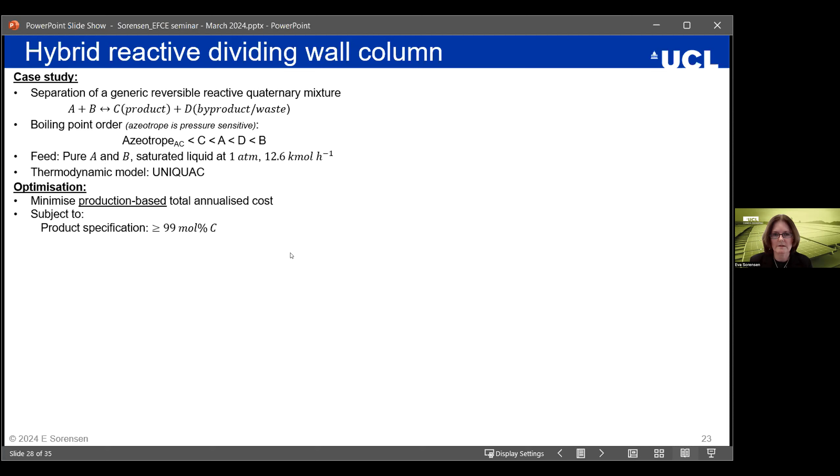Now, because this is a reactive system, we're changing the total annualized cost. So what we're now looking at is a production-based total annualized cost, taking into account how much product we're actually able to get.

The base case I'll look at is the reactive dividing wall column, which I've shown you here, with the reactive area in the column. Because of the boiling point order, we need some additional separation following the reactive column, so I've looked at using pressure swing distillation for that separation. I've also looked at the difference between the wall in the middle and the wall extended to the bottom.

Pressure swing is one way of dealing with azeotropes, and in this case we have a pressure-sensitive azeotrope. The other option is to have this as a hybrid process. So here we've got a standard reactive column followed by a hybrid separation, or we can have this in the dividing wall with a wall either in the middle or extended to the bottom.

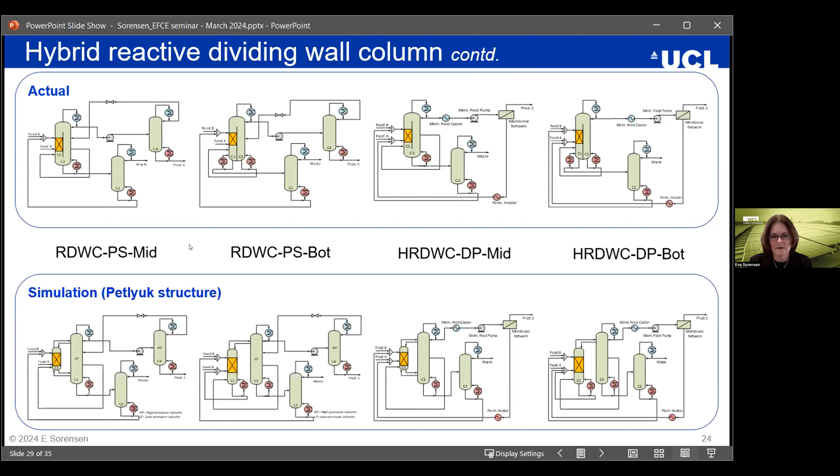Same as before, this is what the actual configuration would look like. What we're doing in the simulation is the Petlyuk equivalence of those.

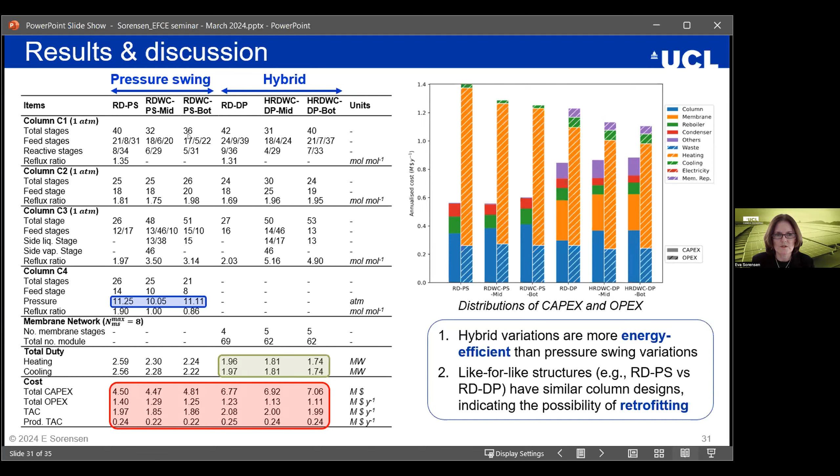We can also look at like-for-like structures and compare the costs. The production-based total annualized cost is fairly similar, with pressure swing alternatives coming out marginally better. Comparing the reactive with pressure swing, and reactive with dividing wall, those are quite similar. The same applies for the hybrid ones. So these could potentially also be considered as retrofitting options.

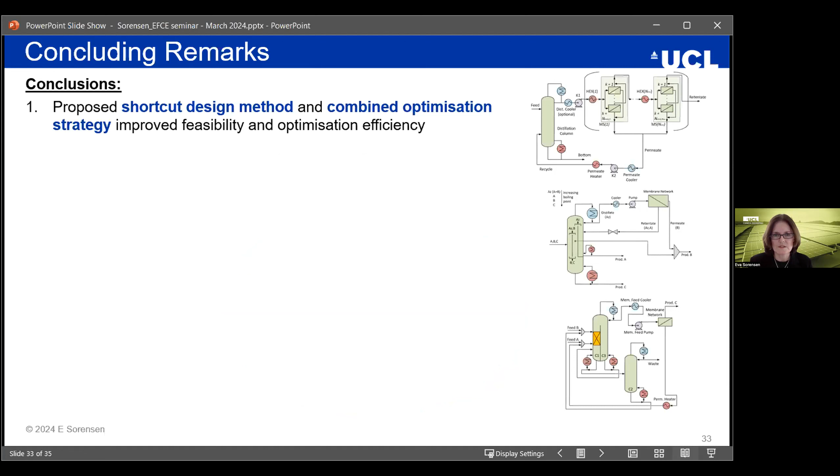What I hope I've been able to show you is that we've developed a shortcut design method and a combined optimization strategy that greatly improves the feasibility of doing these sorts of studies, as well as increasing the efficiency of the optimization.

We've explored the designs and operation of various process intensification structures: dividing walls, hybrids, combining these together, until ultimately the hybrid reactive dividing wall system. These process intensified structures show great economic potential, especially in terms of energy savings. Using vapor recompression, we can also save additionally, so the heat integration is beneficial.

Now, I haven't done this work myself. The people who actually did it are Katerina, Diane, and Fanny. Katerina focused on the reactive part, Diane on hybrid, and Fanny on dividing walls. They've also done this last bit of work together. Diane and Fanny are submitting their PhDs tomorrow, so this is about as close as you can get to submitting a PhD.